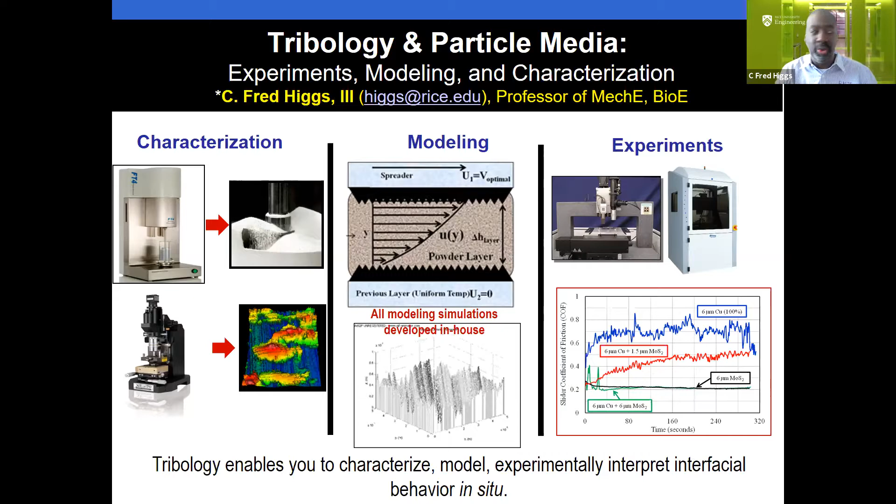This puts us right front and center with Industry 4.0, which I'll fully describe. Here at Rice, we have the Additive Manufacturing Performance and Tribology Center, known as the AMPT Center. We usually have an annual symposium, and we brought Rob here to speak along with other scholars from around the nation, and a couple from outside the nation.

We're focusing on this problem, and one of the angles we look at is the Industry 4.0 problem. Think about the industrial revolutions: the first one was an agrarian society that started adding machines. We started adding machines, and then we started assembling machines together beyond agriculture. Once you assemble machines to work in an assembly, you can put together cars like the Model T with an assembly line. That was Industry 2.0, the second industrial revolution.

Industry 3.0 is where we started putting software on these machines, and everything became automated. But we've recently entered the fourth industrial revolution, where now you have sensors, ubiquitous internet, and the cloud where you can put your algorithms. You have data constantly streaming in, if you have sensors on the machines, so data can come into them, or they can sense their environment and send data out.

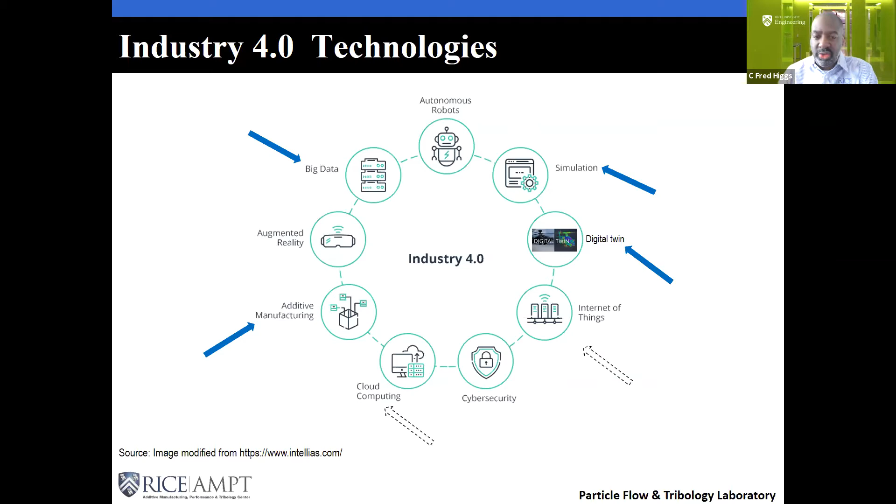Just talking about additive manufacturing - if you look at traditional manufacturing, which is subtractive, you start with the bulk material and just cut away at that bulk, with a machine or manually like a sculpture. You get a three-dimensional object there, but you get a lot of waste once you cut these geometries. But let's reverse that around.

With additive, you have a bit of powder material, and then you piece it together according to the CAD. You get a CAD for the three-dimensional object, and then a 3D printer binds the object solid wherever the CAD says it should be. You build your three-dimensional object without that same waste, just a little bit of what you started with - the more intelligent you get about your starter powder material, the less waste you have. There's also no geometrical constraints once you go from the bottom up, because you can have tubes and orifices.

If you think about it, we have a biological 3D printer, which one of my colleagues is working on. If you had no limitations to the material, you could have little tubes, we might call them veins, and bone material for any geometry. You go from the bottom up, you can create anything.

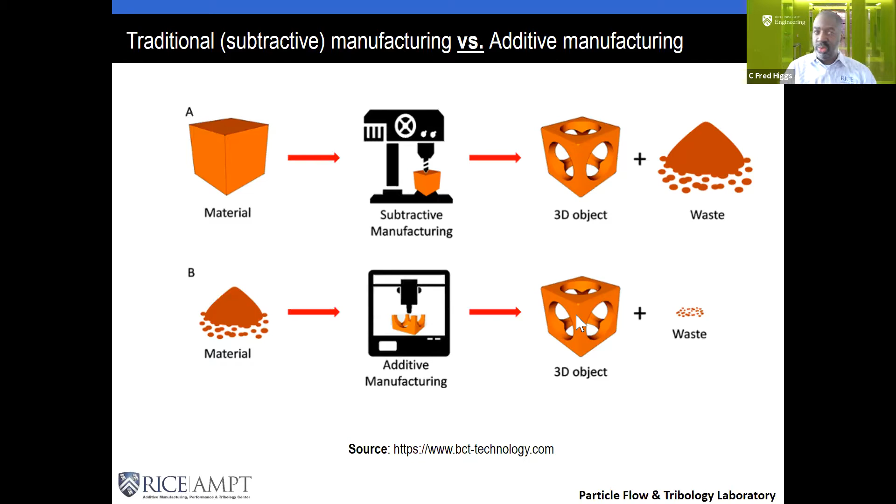Where subtractive manufacturing can't get the interstitial cavities that are there, because you're subtracting away. So the other exciting part is no limitations to design.

Zooming out to the big picture, I'm just showing the 7 main additive manufacturing technologies. Here is vat photopolymerization, light-sensitive 3D printing, material extrusion-based 3D printers, material jetting, where you're actually jetting the material you want to 3D print. We have binder jet, which is actually a powder bed 3D printer, which I'll talk about. We have a metal binder jet 3D printer in my lab, or it does any type of powder in principle. Then the ones you probably hear more about are the powder bed fusion 3D printers—these are both powder beds. Then there's energy deposition, sheet lamination, and others you might not have heard of, but there's 7. These are the companies that make each of these.

I just want to focus in on the powder bed 3D printers. So we're still talking about powders, and powders are interesting, right? They're particle materials which my lab has studied now for 20 years, that plus a little bit of my postdoc.

You have particles with moisture between them, fluid can get in between them. You can put stresses on them, little electromagnetic forces on those—I know Rob studies that with MEMS devices and other nanoscale devices. Particle size distribution, surface roughness, all these effects, cohesion, come into play when you're looking at powders here.

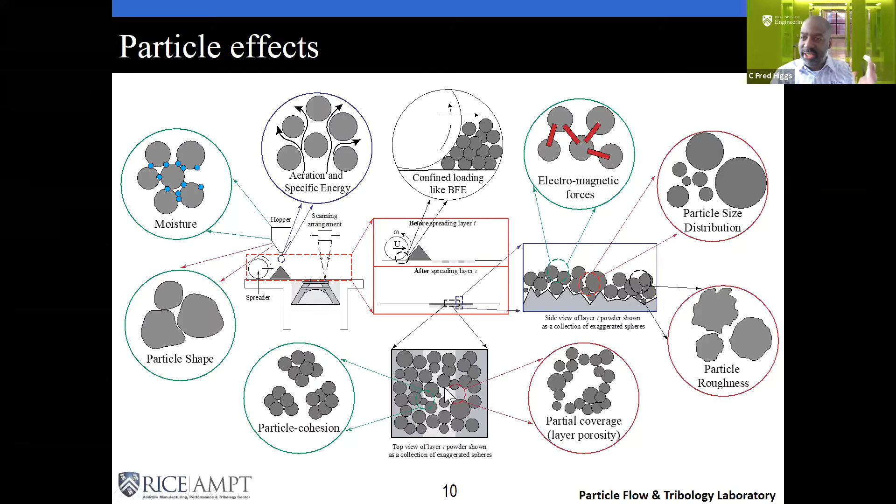Based on this top view of the powder, if you think of this in 3 dimensions coming out of the screen, as you keep putting different layers on, you're going to have different levels of porosity, which at the end of the day is bad if you're 3D printing a solid object. So your ability to understand the powder mechanics helps you understand the final part.

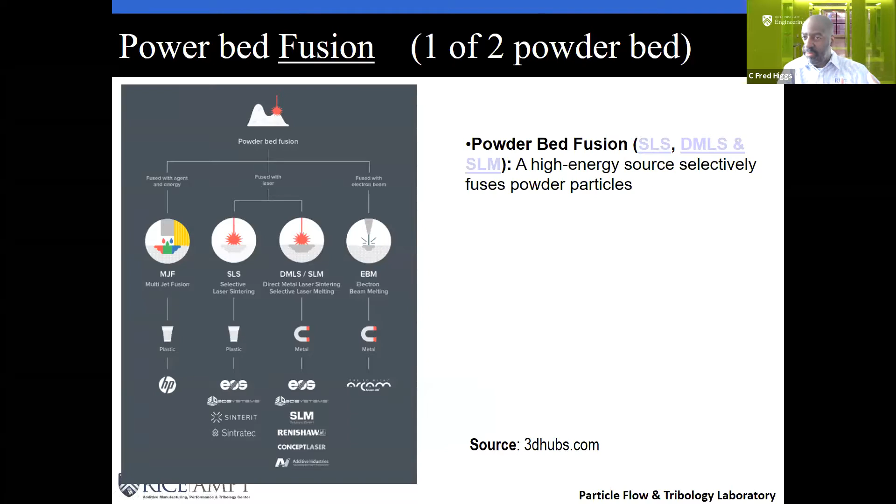Here's just a zoom in of powder bed fusion. Basically, my lab looks at it in terms of the binding mechanism. Here, the binding is beam-based—laser beam or electron beam—and that's how you solidify the powders. But you could also have a fluid binder process, like in binder jetting, where you have liquefied glue essentially, and you hit the powders, forming what we call primitives, these solid objects. You do that intelligently, understanding what's going on. This printer here is in my lab.

So I do want to dig into what we do with this a little bit. It comes down to these steps: powder delivery, powder spreading, powder jetting—that's the binding process, binder jetting—and then you lower the platform and do that all over again.

At the end, you have a wonderful set of chess pieces. If my son is on this call, he'll get excited—we're just starting to get into chess here.

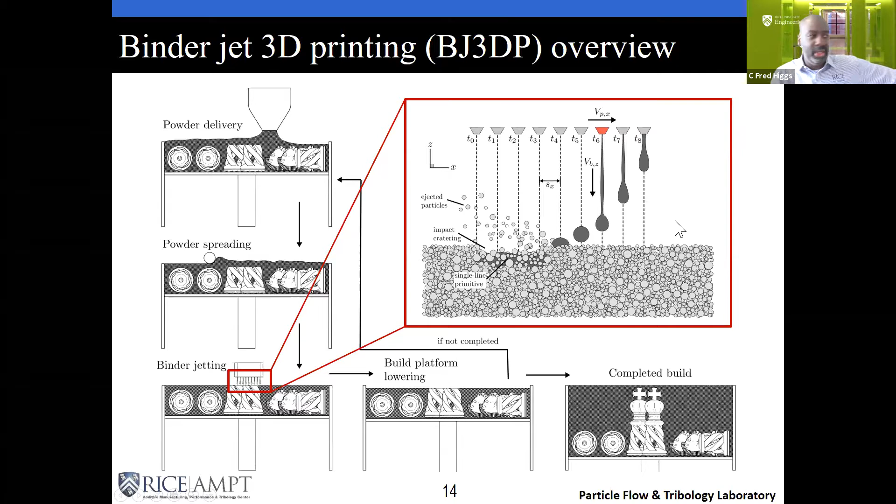But the action of the binding is also important. You have a lot of fluid particle interactions as these droplets come down from the binder jet. You have different binder jets, and they hit them at different times. You have all types of particle ejection and particle coalescence due to the fluid there. I want to simplify that in terms of these steps: powder delivery, then you spread the powder, binder jetting, and finally sintering.

It turns out that as a particle tribology guy like me, this just came right into our wheelhouse. We had a hammer, we were looking for a problem, and this came right to us. We're very excited about that—that's what PhDs are, we have students on the call. We're experts of this, but when you come into our expertise, we get very excited to unravel that problem and help solve problems for industry.

Let's look at one of the first things I want to show you: powder spreading, and what we've done with that. We have a powder rheometer in our lab that basically stirs powder and gives you the amount of energy it takes to do that. You can put air and fluids through it, stir it, and look at the different energy signatures of the powder. It allows you to find out something about the rheology of the powder, the flowability, and what we've brought into the AM community as a new term—the spreadability of the powder.

So here is a particular powder—here is Ti-64, titanium 64.

Here we're looking at it for different companies. EOS has a Ti-64, Arcam, Ametek. These are the first two 3D printer makers there.

And here you can see the bulk flow energy, the amount of energy it takes to stir that decreases, right? Here's the first one. It decreases as you increase in the manufacturer's different powders, which have different particle sizes.

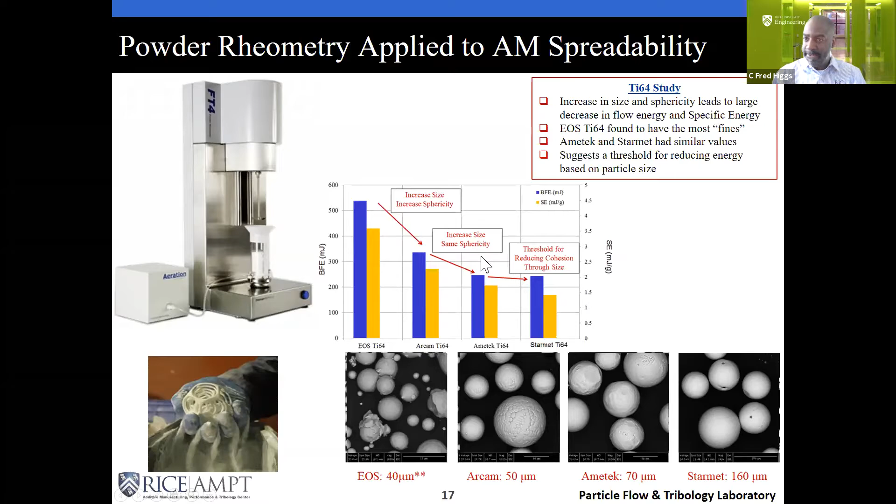And that's going to be important for our modeling, because here you have the physical rheometer. And again, as you get into kind of industry 4.0, it mixes - some people call it cyber physical, or mixing the digital and physical communities. You'll see how we do that in our laboratory here.

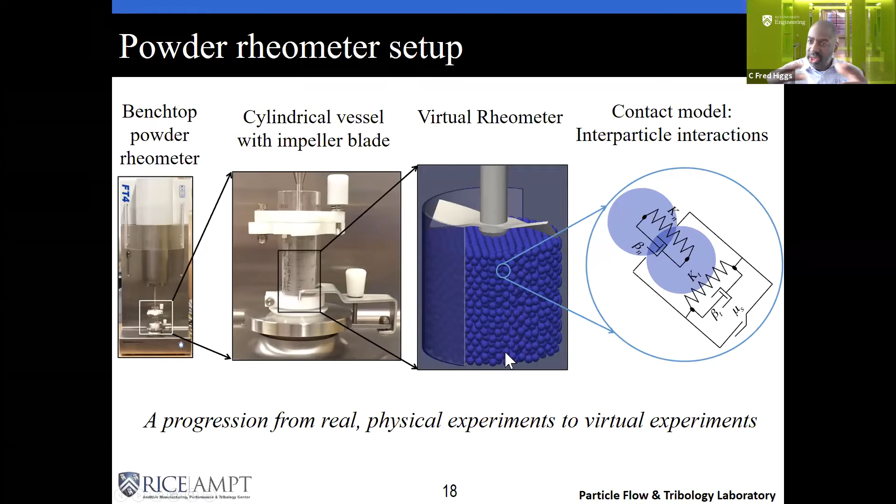So you have a physical rheometer there, which is a cylindrical vessel with the impeller blade going in the powder. We create a virtual form of that rheometer, or a digital twin of that rheometer, and then we do the contact modeling of the particles there, where we use the discrete element method to look at the interactions between the particles there.

But we always are validating these things, and then we can get lost in having fun and optimizing in the virtual world or the computational world.

So here's the ExOne binder jet 3D printer in our lab. There we have different types of characterization experiments we do with it. We've built a small build plate here to make little coupons that we can focus our analysis on there.

So here's the example of one. We look at - here's the printer here, has created these different cuboids, right? And remember, this is 3D printers, so we can put different process parameters literally on the cube.

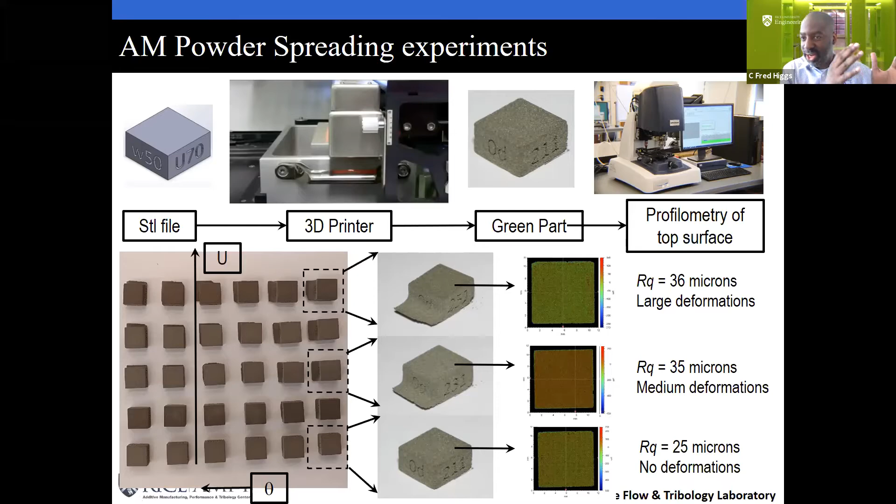So for every new powder that comes in, every lab now, you see those beautiful 3D printers? They are beautiful - they look like the Xerox machine, but they're not perfect like that. They're research problems always. So any new powder that's brought into your lab, it becomes a research problem to get to getting the perfect spread.

We want to be able to have models to guide that. And so here we've done that. So here's a spreading simulation here where we have a roller rolling over powder.

We're running a discrete element method on the powder. As the powder changes colors, you're watching the velocity magnitudes there. And then we can just look at the quality of the powder in the virtual sense.

Then we bring machine learning in to connect the inputs. In this case, it'll be the spreading parameters like rotational velocity of that spreader, linear translation velocity, and then we input what we want the roughness to be for the different layers. And then you get different outputs there, like porosity and surface roughness for the overall object.

And so then we end up creating these process maps here. In this particular one, it relates the throughput of the volume, the amount of powder that you can spread, to the surface roughness. And you get these different curves.

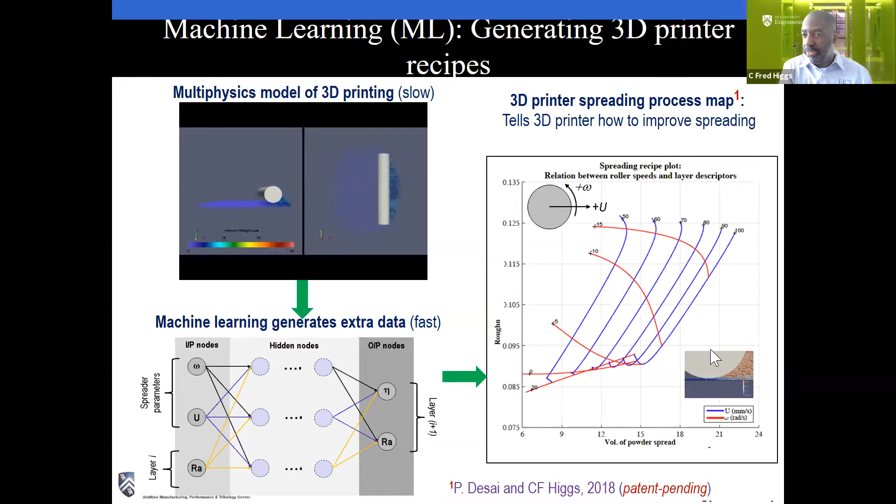It's a tractable curve that an engineer can come and say, oh, for this powder, I need—red is the rotational velocity of the spreader, and blue curves are the linear velocity of the spreader. I need to get to this point to achieve this roughness at this throughput of powder. And so we have that there, or you could program that into a printer and have it controlled.

And so, I would like to say to the students, we still are engineers. That's why I became an engineer. I was excited about it there. But so we try to always translate whenever possible to industry.

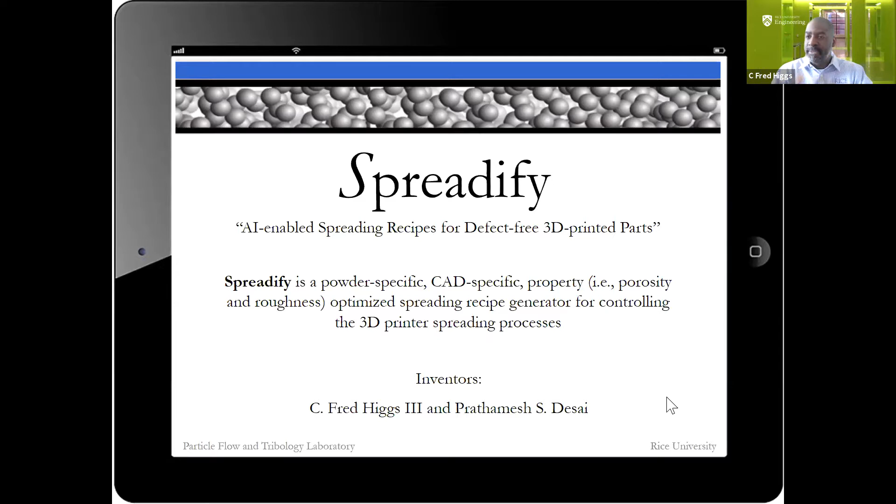And so in this particular one, all of that work goes towards a tool called Spreadify, where AI-enabled spreading recipes for defect-free parts, meaning low porosity, no distortions as much as possible. And you're using physics to figure out what the winning recipe is from that process map. And then you would tell the printer, these are the parameters for spreading this particular powder.

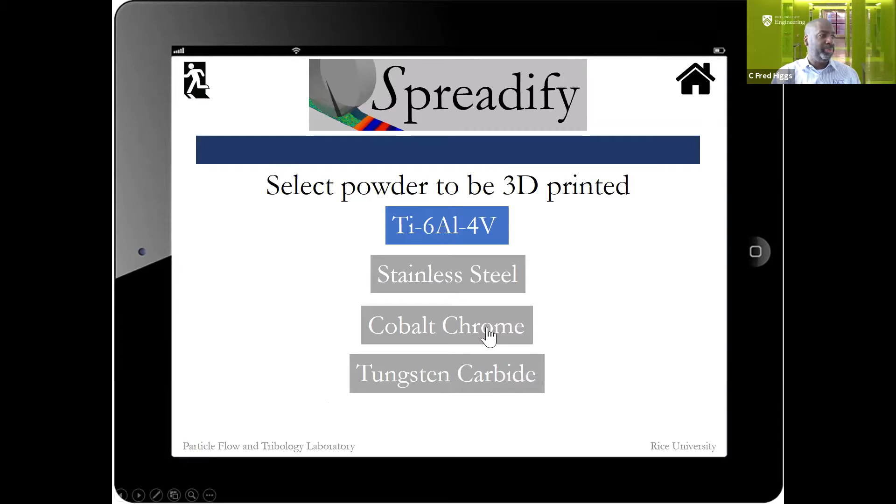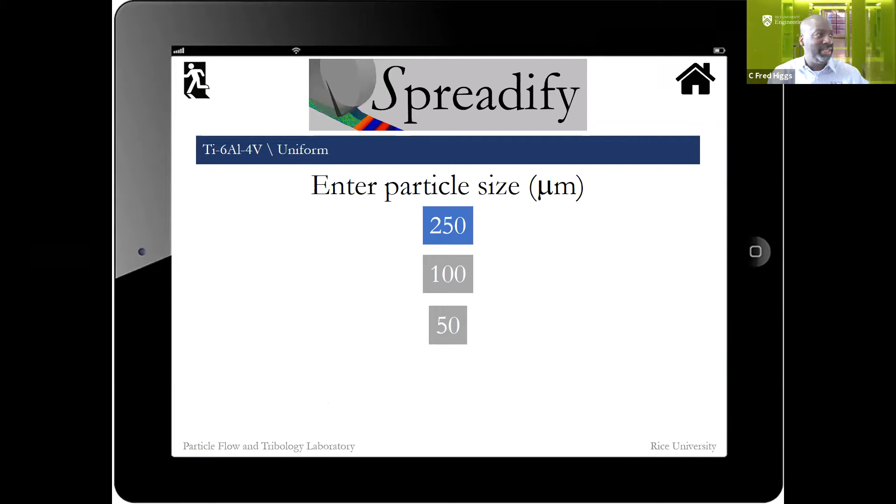So we come into a tool like this, Spreadify, click enter, which powder do you want? Ti-6Al-4V. Particle size distributions can be of different sizes. We'll say uniform. What's your particle size there? It relates to the amount of energy it takes to spread it. We'll say 250. So now we have a virtual avatar there, or a digital twin of the rheometer.

It's spreading, doing the analysis there. And as it turns out, it gets to the end, and you can figure out, well, what do I now want to 3D print? Let's say a cuboid here.

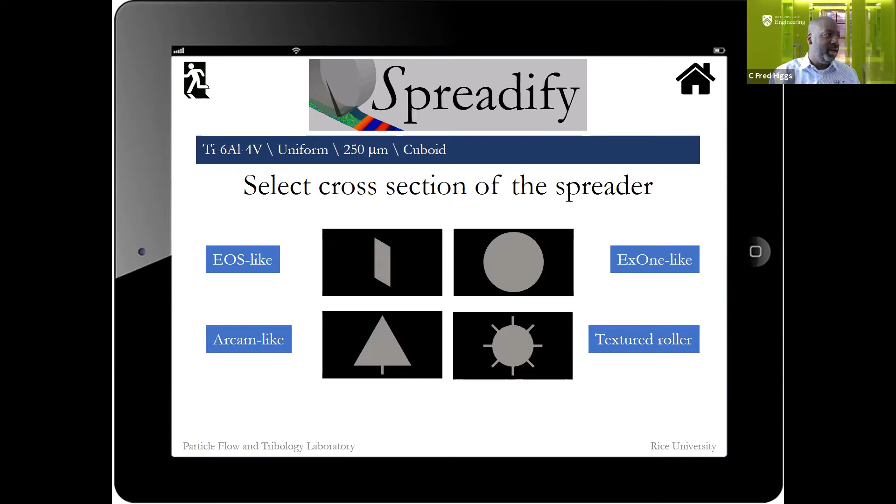What is the geometry of the spreaders? All the 3D printers have different types of spreaders. To us, it's just a boundary condition issue. And so you can have any of these printers, like the one in our lab, or the Arcam, or EOS. These are beam-based printers, so they get it through energy beams.

And so here's one for an Arcam-like spreader. We spread that same pattern, and we would tell them what the spread recipe is, or what's the spreadability for this particular simulation. Then that's fed to the 3D printer. Here's the ExOne, it's a roller, right?

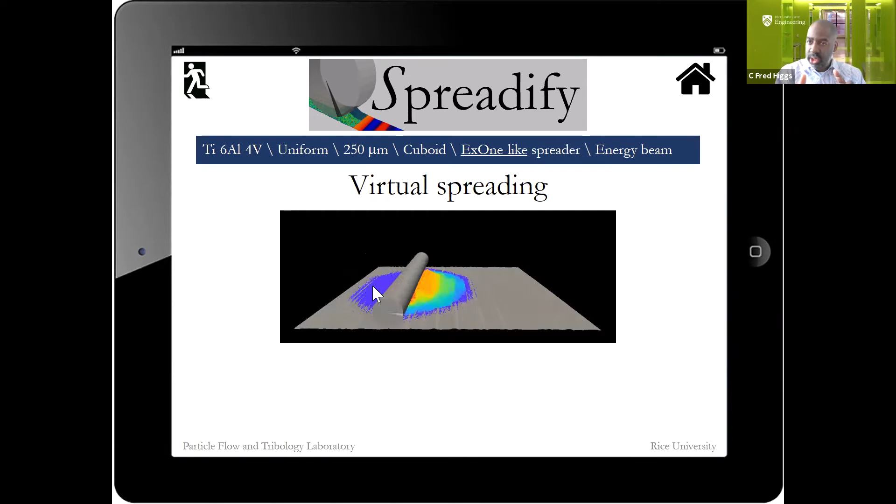So as you're spreading this powder, look at the—I'm a tribologist—see the undulations on those surfaces there? So we are accounting for the surface roughness on the build plate or each lower layer.

And here's one from a textured roller, right? We talked about doing this. Basically, you look at the roughness of the powder—can you design a texture for that? A tribologist like Rob would get excited. He'd probably say, hey, I can put a fractal signature. Actually, Rob doesn't like fractals. He likes multi-scale modeling, which is a competitor method to looking at roughness. But can you figure out what is the proper texture on a spreading device to achieve a certain smooth roughness? All these things are surface interactions. These are things that a particle tribologist like me would get excited about.

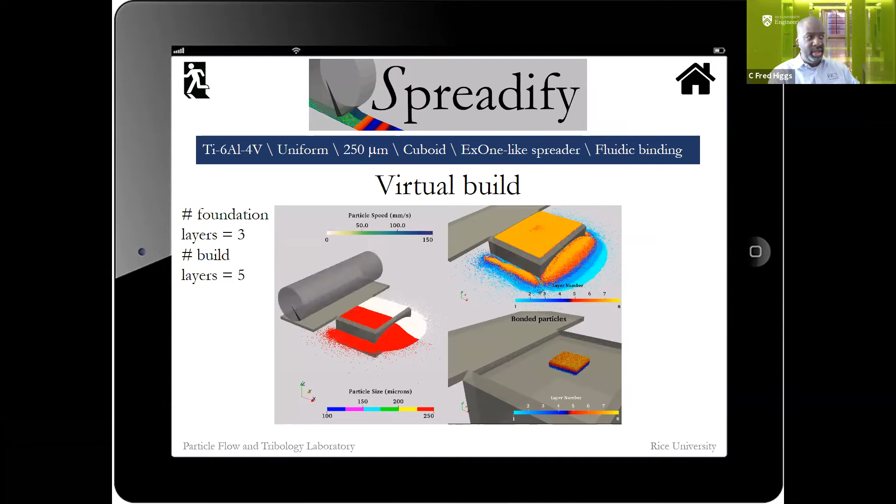And so once we had that, then you say, well, let's do a virtual build. Let's look at the cuboid and see if it comes out distorted. And so we do a virtual build on that. So you have a digital twin of our ExOne printer going in and making this particular device here. Yet we haven't talked about the binding process there.

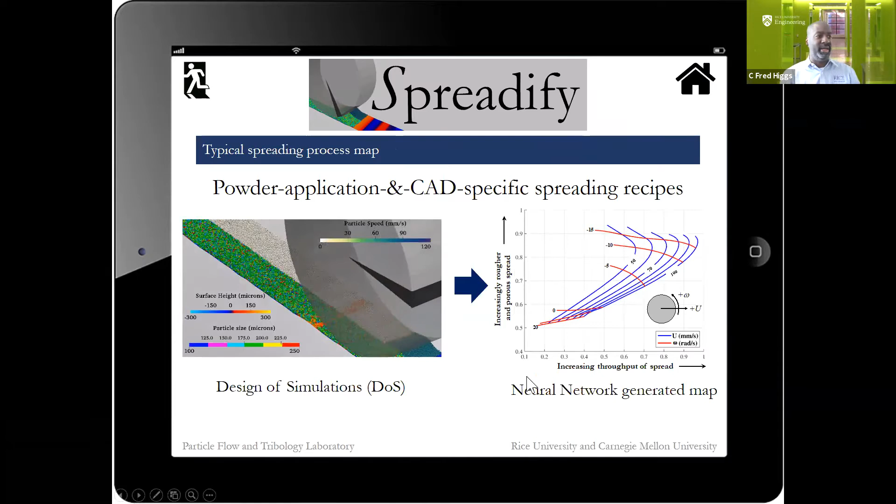But out of that, you come up—we always are coming up with these tractable process maps here. Again, you find the coordinate to achieve faster printing, to achieve a certain roughness, low porosity there. And that's what you're trying to come up with. We're just looking at different simulations there. And then you start your 3D printing. All this is done to prepare for the 3D printing process.

Now let's look at that—that was all powder spreading. But what about the fact that if it's a binder jet printer, you have droplets coming down, forming that?

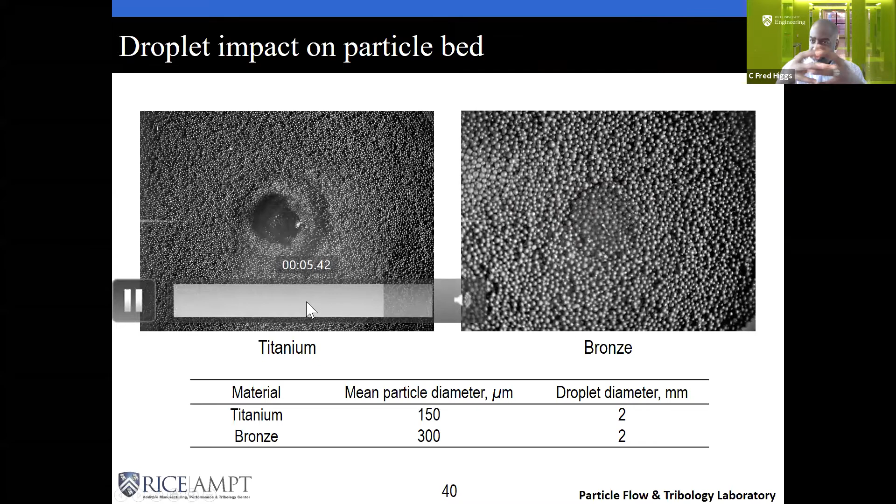Is there a tribology problem inside of that we can get excited about to optimize the performance? And there indeed is. Here's a look at a droplet coming down on two different powder beds. On the left, it's a titanium powder bed. On the right, look at that, it pulls these particles together. The fluid forces are pulling them together into what we call a primitive there. We want to see if we could begin to look at that.

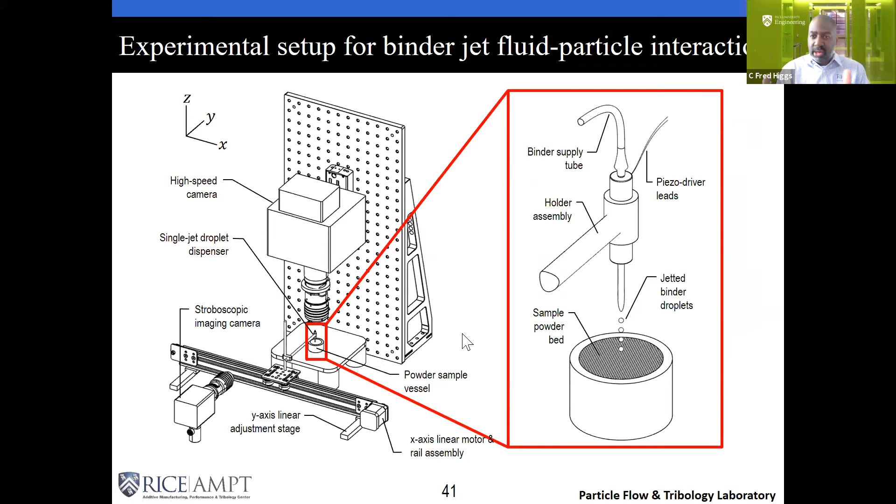So we created an experiment in our lab. We always got to validate our models, then we can go to town with the models. So we have a droplet experiment that we put here. We can drop powders in a controllable way, fluid droplets in a controllable way on different powders. We have high-speed imaging, so we can image that and begin to see if we can come up with a performance criteria to judge the quality of the binding.

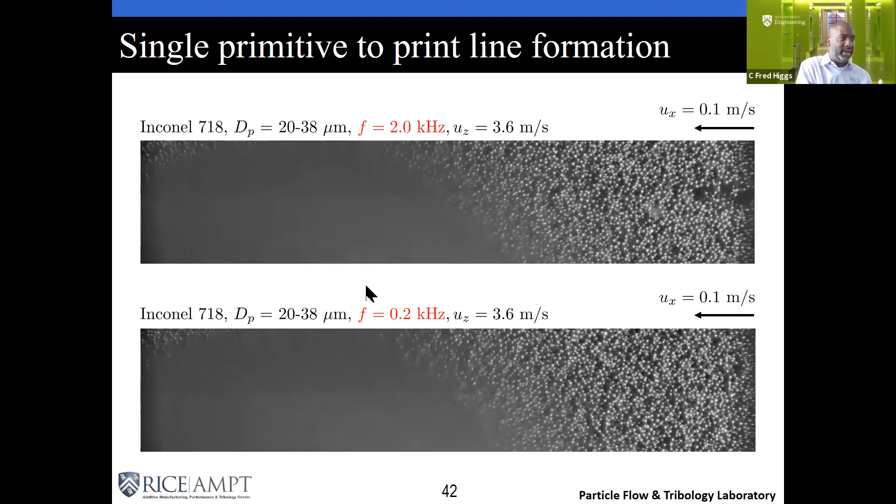So here you can see the top one, these are similar simulations, except the top one is going to have a faster droplet frequency, and the other is going to be a little bit lower. So we let them come across, and you have the various types of binding that's going on with the powder that's there. Everything else, you hold pretty much the same.

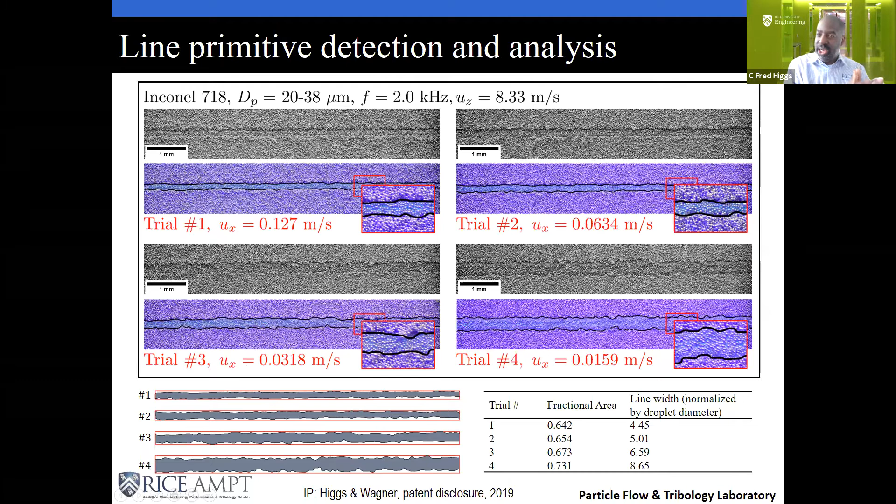And so we end up coming up, we have different trials, and we start to have a criteria for judging it. This particular one, we say maybe the best way to look at this is to put a bounding box around the different primitives that were formed there, and look at the fraction of that box that is formed into a primitive. From that, we have high fractional areas. So we could say something like trial number 4 was the best one because it had the largest fractional coverage area. But these types of things start to get us towards being able to judge what winning is when we go into looking at this as a model.

So let's get right into the computational models. I'll remind you that all the models you see in my lab are done by hardworking PhD students, so there's no commercial codes used. We have all of our codes in-house designed from the ground up.

One of the things we try to do for the tribology community is look at lubrication approximations, but we try to bring in things like the Reynolds equation, and also bring in the full 3-dimensional time-varying computational fluid dynamics. I teach a CFD class, so the students come into my lab ready to do this. And of course, we have the discrete element work that we talked about earlier, where you're looking at forces on particles. Bringing that together is what you need to do to model these different problems.

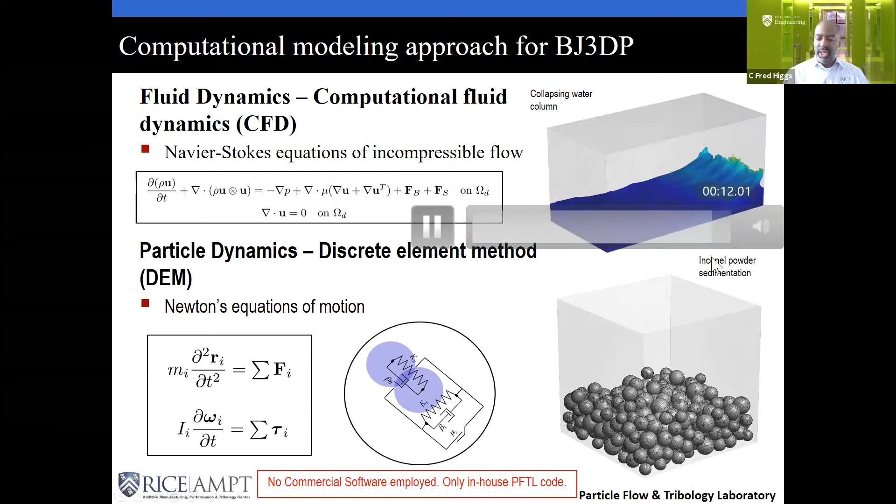So let's look at our approach. We've been using this volume of fluid approach to account for the fact that you don't have the full domain in a fluid, but just some places in the domain have a fluid. Here's a look at just dropping a solid particle. This is not a fluid particle yet. We're watching just basic interaction, dropping objects on powders to see if we can account for what we've seen.

In the community, we know there's particle ejection. You can see these particles bouncing out there, and then there's particle movement too. So our powder bed looks to be okay in how we're accounting for that. We have the real properties of Inconel powder, which is one of the three-dimensional powders. So we felt good about that.

But now we wanted to bring into effect fluid droplets. The fluids don't hit everywhere. It's not fully immersed like most of my work that people have seen. So we had to use this volume of fluid approach where you're looking at the difference in phases there. One phase might be air, one phase might be liquid, and you account for those different concentrations in different zones.

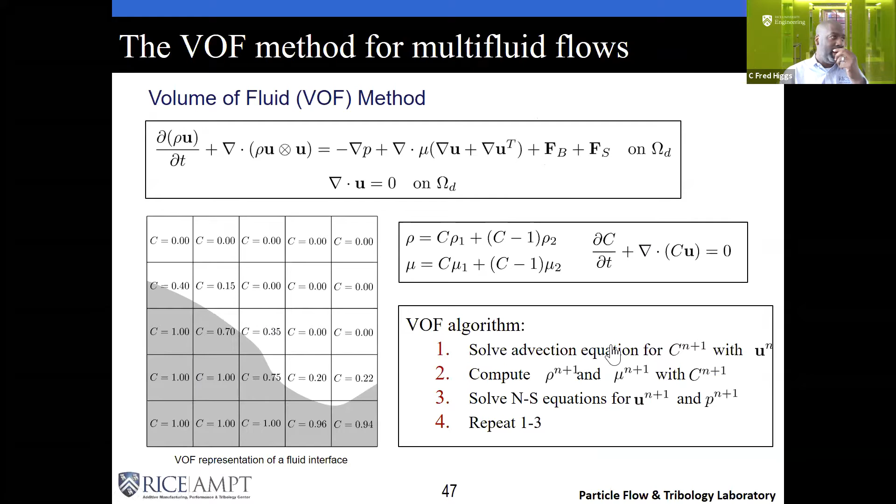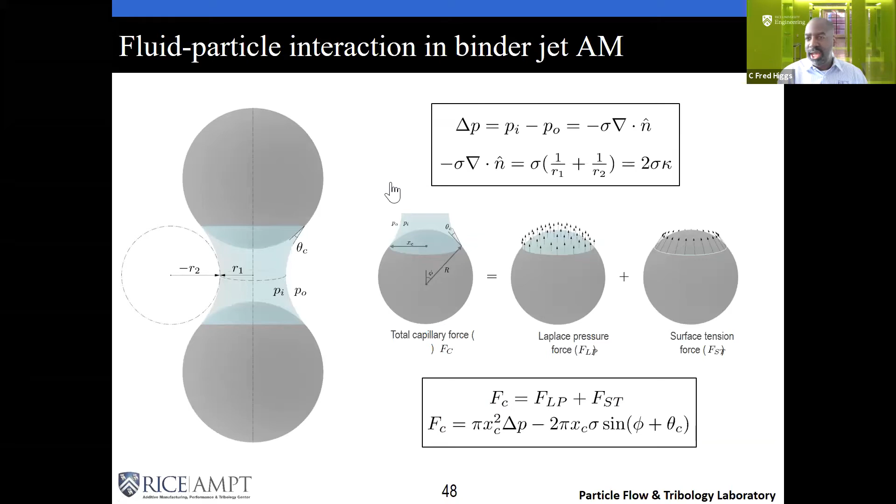And then you could track the interface between different fluids there. Then there's fluid particle interactions. You have fluids pulling on particles, creating a total capillary force, which is a function of the Laplace pressure force

and the force due to surface tensions pulling on these particles. So now we're ready to look at a fluid dropping on a powder bed, not a solid particle, but a fluid particle here. And we're looking at it for two different contact angles - the angle between a fluid and a solid surface. We've input this as 30, and we've input as 150, more hydrophobic here, this is more hydrophilic.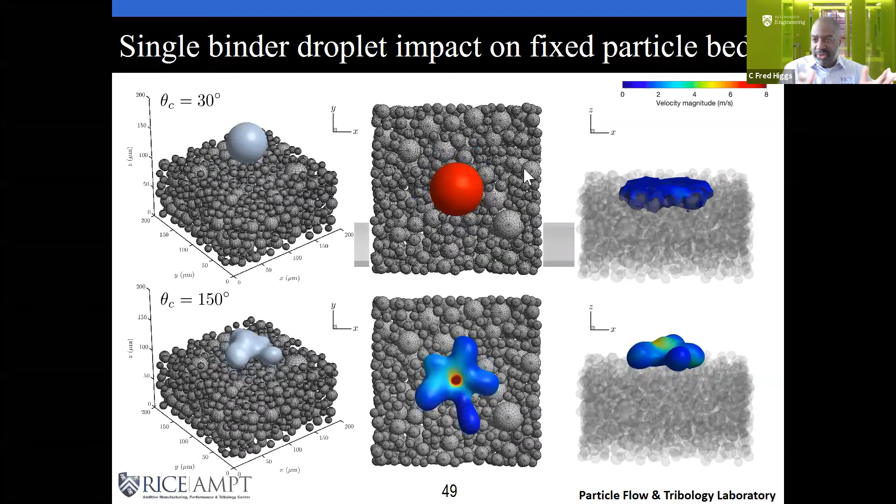You can see now, this powder bed is fixed for this simulation. We just wanted to look at the fluid behavior against a solid powder film, although the powders are not free to move in this simulation. And so we kind of like what we saw there.

So then we said, well, let's look at it if multiple droplets are hitting a powder bed. And we thought that looked similar to what we've observed there. And so we said, then let's start to relax things.

We used our simulation and saw that we could get a pretty good match with the simulation there. So it gave us some confidence in our fluid particle interactions.

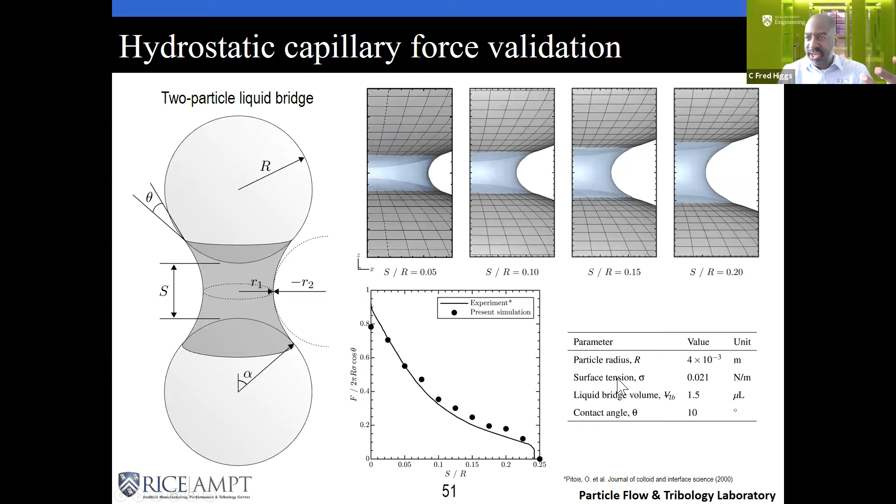So now we said, what about it in a tri-particle situation? We have three particles together - what about the liquid bridge there? And we saw, again, we're reasonable with our simulation, the solid dots there.

We actually match closer to this Surface Evolver curve, which is a different way that people looked at it, just looking at the energy between particles. We were closer to them than to the experiments there.

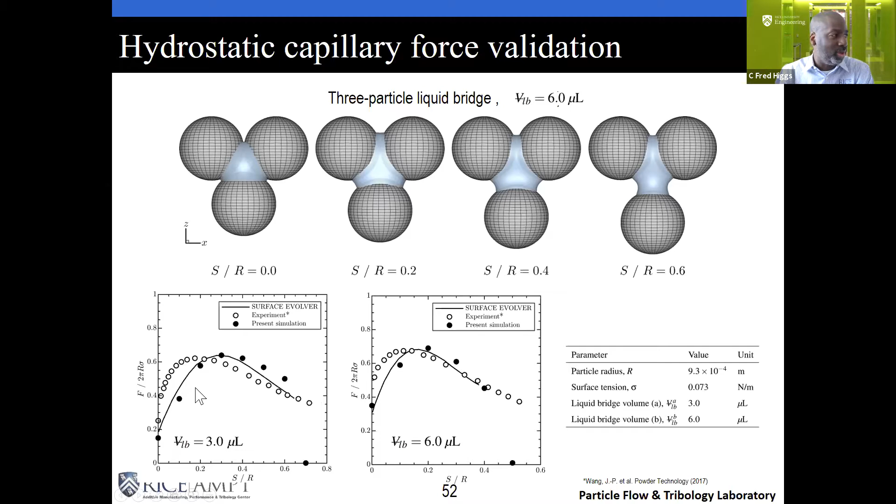We went back and looked at the literature, and it turns out from the experiments, they had doubts on determining what their spacing was. So we matched another well-known simulation there, and the experiments expressed doubts in what's the true distance and the accuracy of that. So we don't feel too bad about being off since the experimenters were not totally confident in their distance.

But so it shows us that we're able to kind of do this. Here's a simulation where you pull things apart and you look at the forces that are on them, all the way to breakage - at the end, it breaks off. And that's where our simulation shows the forces decreasing as the distance between those spheres is increasing, and then it goes to zero as you break the fluid filament.

And so that let us know that we think we understand fluid particle interactions. Now let's look at it in a bed, fluid droplet hitting a bed, powders allowed to move freely, just like you'd have in 3D printing. And let's see what will happen there.

So you have over here, this one - look here though, the top view. As it hits those particles, it begins to pull them together into a primitive, right? And the size of that primitive is the resolution that you can print. So you can imagine the different size particles and the type of fluid that you have all going to the primitive that you get there.

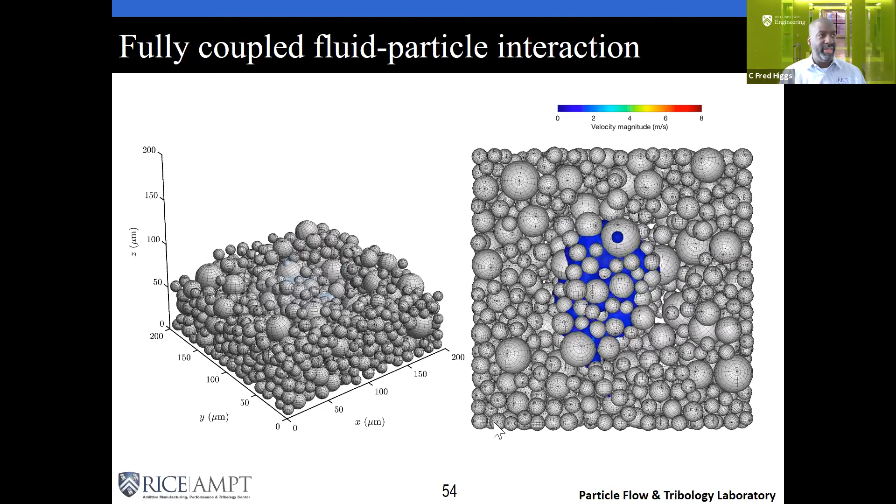And we're modeling this accurately, which means we can now start to do increased frequencies and linear translations and things like those, which I'm not showing in this talk. But all of this is really understanding particle fluid interactions.

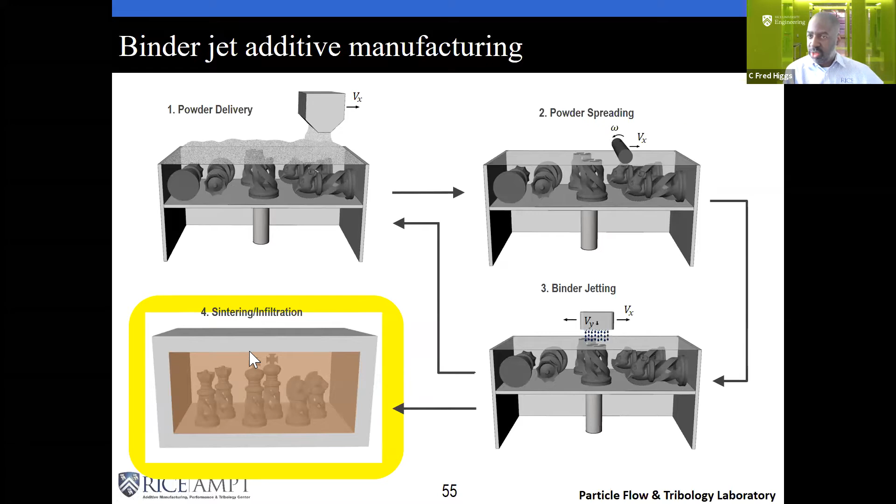The last one I want to show just briefly is sintering. Are we working on that problem? We consider that largely a material science problem, although we're particle people. So we team with my colleague, Zach Cordero at MIT, and we have a joint PhD student, Lenora Grant, there.

And we've looked at this problem of what if the binder itself goes down and can crystallize into little particles in between, little nanoparticles. So it comes in as a liquid, it crystallizes when it's heated into nanoparticles that can then fill the gaps between particles.

Will that cut down on sintering? Because it turns out at the end of binder jetting, you have to heat up these systems and watch what happens to them. So when you heat these up, you want them to become solid geometry that won't move.

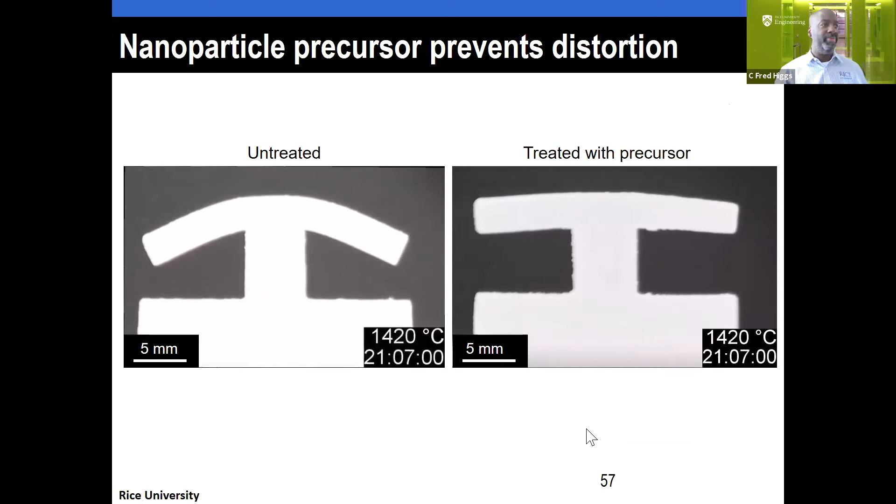But the problem is that they distort. So here we use this precursor that we put in, a titanium dioxide precursor, and it formed these solid necks, and it did reduce the distortion there. So here's untreated, this is what you normally get in binder jet 3D printing if you don't do a smart solution. Companies like ExOne and others have their ways of trying to deal with this. Here's a look at one with our technique where we put in a binder that can turn to solid particles. You do decrease the creep that's there and the distortion that results.

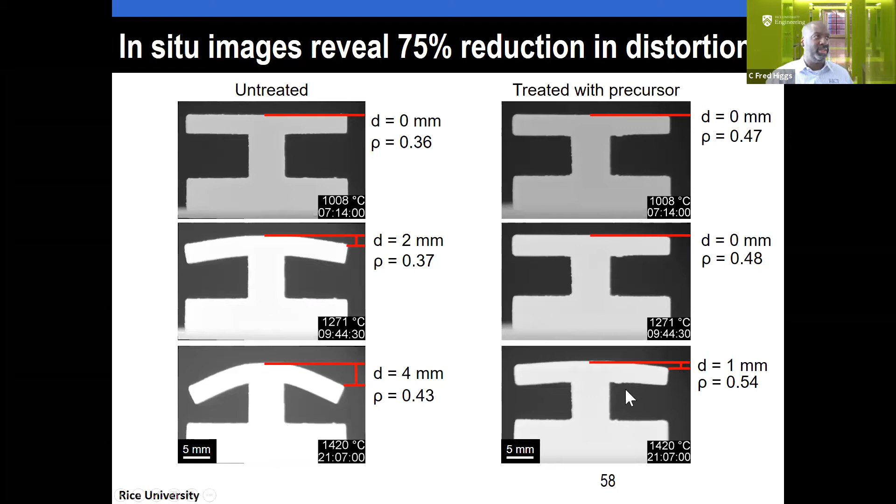So now you can see that we pretty much can model the entire binder jet problem in some form, or at least we're involved with it. Let's apply it to a problem like energy.

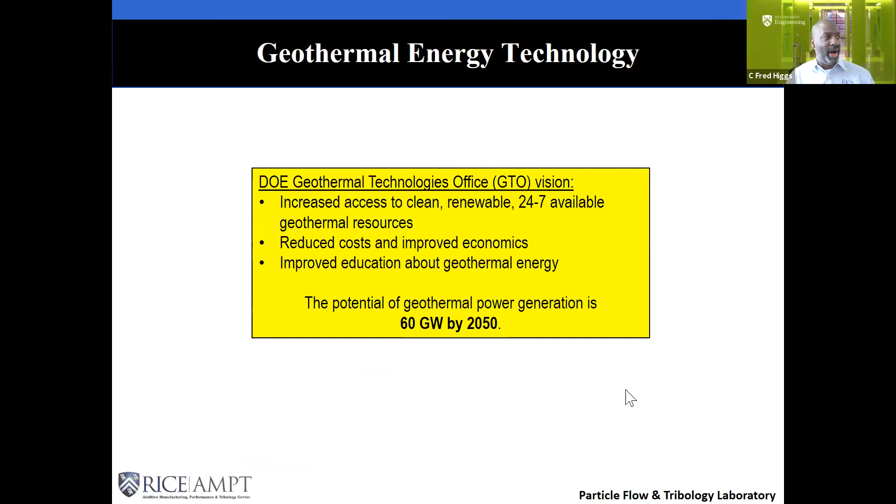So you have geothermal drilling. Basically, you want to get down to where there's a lot of heat to be able to run different things. There's a lot of geothermal reservoirs in different parts of the United States.

Well, this is an exciting problem for my mechanical engineering undergrads. I like to put up a thermodynamic cycle. Basically, geothermal would just bring you heat, right? And now you can heat your working fluid. And so your working fluid goes around to the turbine, generator, get electricity, goes to a condenser, condenses back out, you go around.

So where you have the boiler, you would run geothermal heat free from the ground there. And that's what they do to create power from geothermal systems. To my thermodynamic students, I like to show that.

But back to the drilling problem, you have to get down there to where these geothermal reservoirs are. So you're drilling down there. And so you want to have a drill bit like this polycrystalline diamond bit communities use for doing that. It's a clean energy problem. So not all drilling is bad.

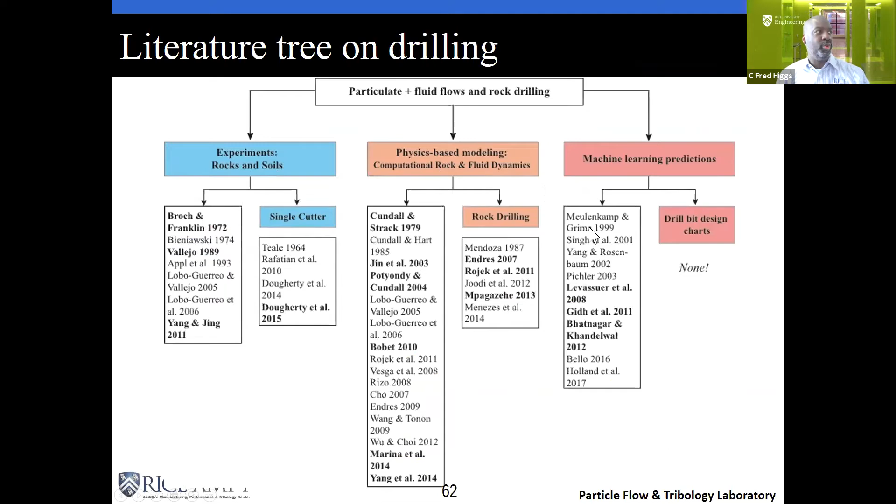So, you know, we have done a literature survey behind it. Young scholars, you want to get into the literature. Here we've looked at different experiments and modeling and other things that you're doing with the drilling problem there. And it forms the design-for-additive manufacturing framework, which you'll see with us.

So you start with the rock, you characterize the rock, you characterize the powder because you're going to give a recipe to a 3D printer. You get digital twins of those here. We do literally virtual characterizations.

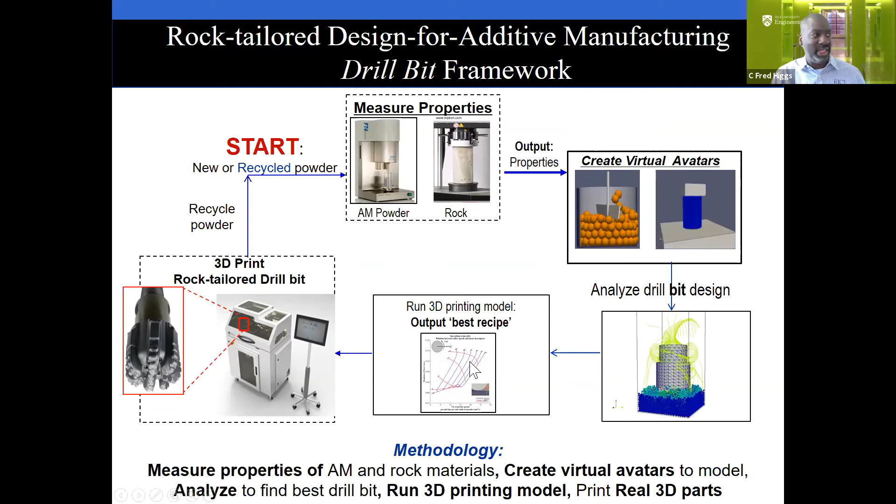And now you can put a drill bit in that, optimize for rate of penetration, get your nice process map, tell it to the 3D printer, you can print out a drill bit there. Here we have a drill bit spinning in fluid. We run the full CFD analysis ourselves.

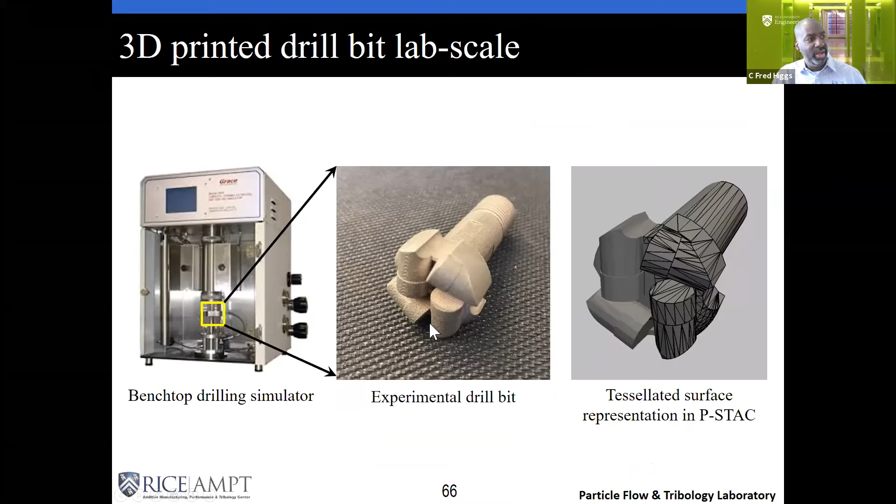We end up printing these drill bits in our lab there. Notice there are different cutters on there, and the different angles form the different types of PDC bits that you have. So here's a look at a drill bit going into a rock there.

And so we do different drills. We can look at what that means against experiments. This is our in-house code, again, that we've made from the ground up, P-STAC, Particle Surface Tribology Analysis Code, so the T is tribology. And this is just a dry one.

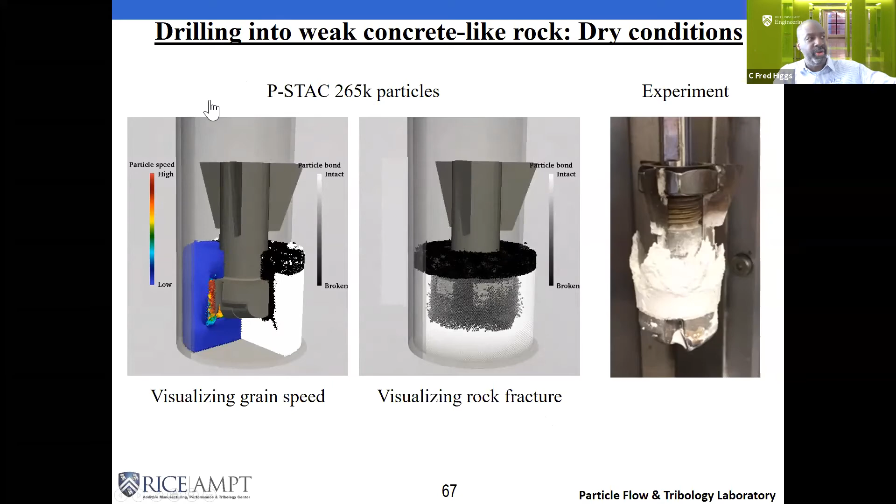What happens when we put fluid in there? Here we have the fluid in here as well, being accounted for. And now you're drilling that rock. You're watching the rate at which it goes into the rock. It's known as the ROP, rate of penetration.

I like to show this simulation. You see this? This is fluid pressure to my tribologists there. So we're looking at the fluid pressure under the drill bit, and it generates a little lubrication pressure. We take that lubrication pressure away from the weight that's on top of the bit. Weight on bit is a property that's in the drilling community.

So we say the weight on the bit is reduced a little bit by this fluid pressure that's there. And so you have a new resultant weight on bit that you need to account for when you're looking at your rate of penetration.

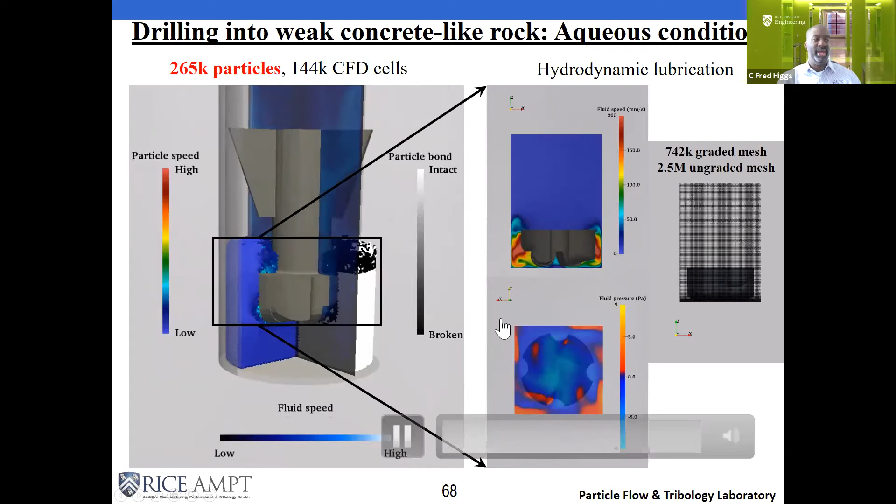So we are solving for the lubrication problem right beneath that drill bit as it's going into the surface. And so we end up with experiments and modeling, something we're still working on here, getting the exact same experimental system. We can do it for lower loads, and basically the same speeds. But we're working towards that, and based off of getting that match against the experiments, you can begin to change the design of your drill bit to achieve a certain rate of penetration for different types of fluids.

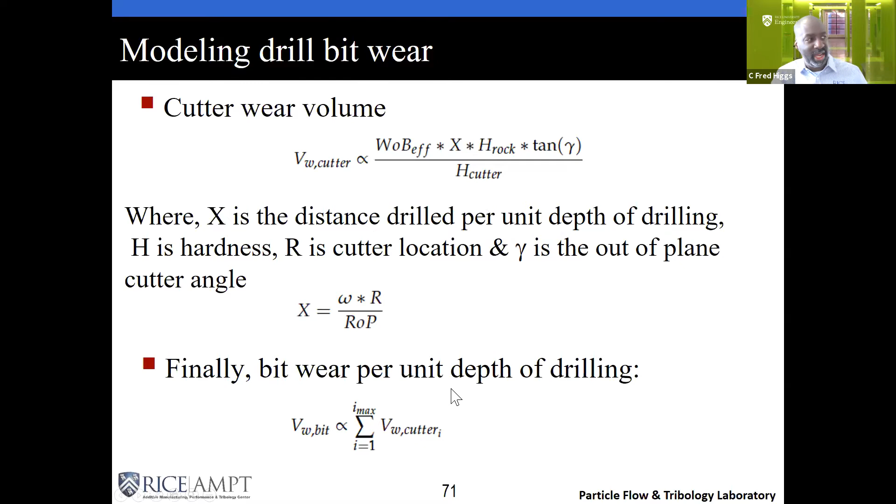So, for example, we can look at the wear on a cutter, per unit depth. So we have properties in the cutter, we can account for that. We can then say, based off of these parameters on your drill bit, you can have a certain rate of penetration. These are just switching input and output parameters.

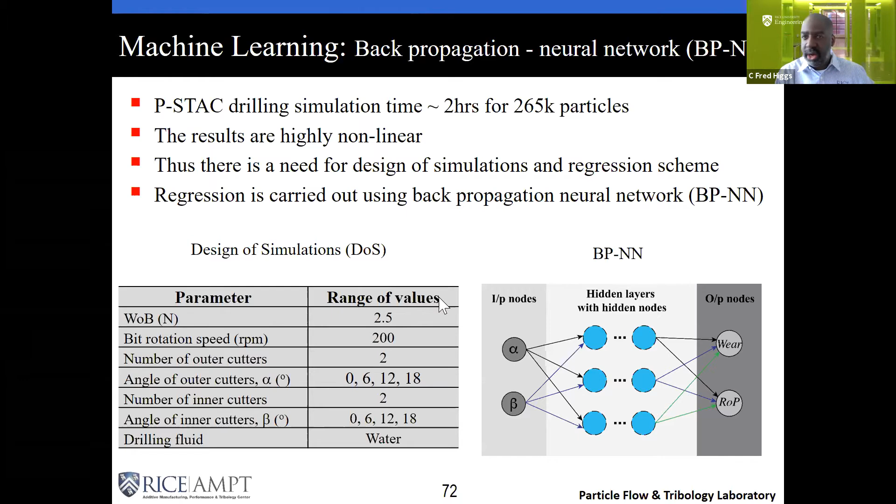So we run our full physics-based simulation. We run a few of them, and then we start to have machine learning guide the physics-based model. It runs our physics-based model to get a bunch of parameters, and then generates a mapping between those two. And so we get something like a blanket like this, where you have training data. First, we validate our physics-based model, and then that model becomes our key data.

And then we throw out a few points to match for different angles on the cutter, on the PDC bits. We look at the wear volumes there, and we test that, and then you watch the points. You have some data that you train it for, and some data that you test on, where you're blind on things, and then you see if you have a correlation. We get pretty good correlation there. Now that means you can get away with your physics-based model, put that away. Now you have the neural net that can represent that system.

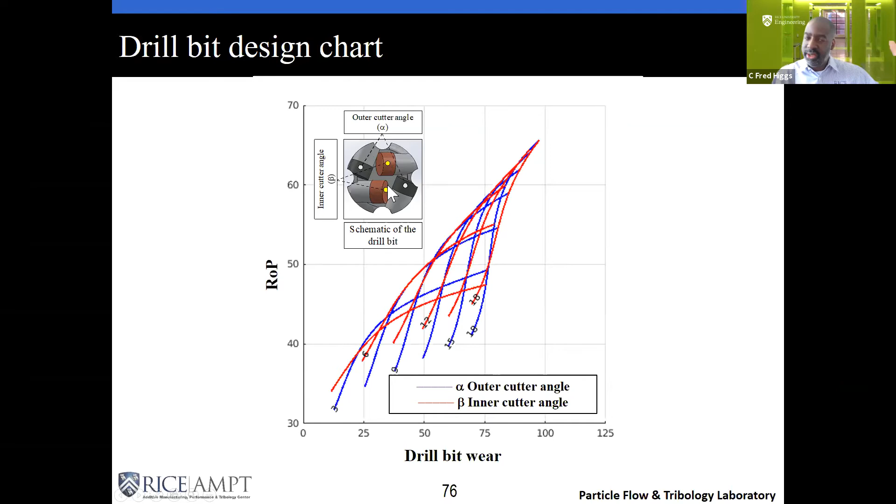And so you end up being able to generate something like this, a process map. We love our process maps, where the coordinates of red and blue go with the different cutter angles on the PDC cutter, and you have a final drill bit wear and rate of penetration that you could predict. So the design parameters are red and blue, and the performance parameters are, weirdly enough, on your X and Y axis. So you change the design parameters, you get different levels of wear, different levels of rate of penetration. So now you have lifetime prediction, and performance in terms of rate of penetration.

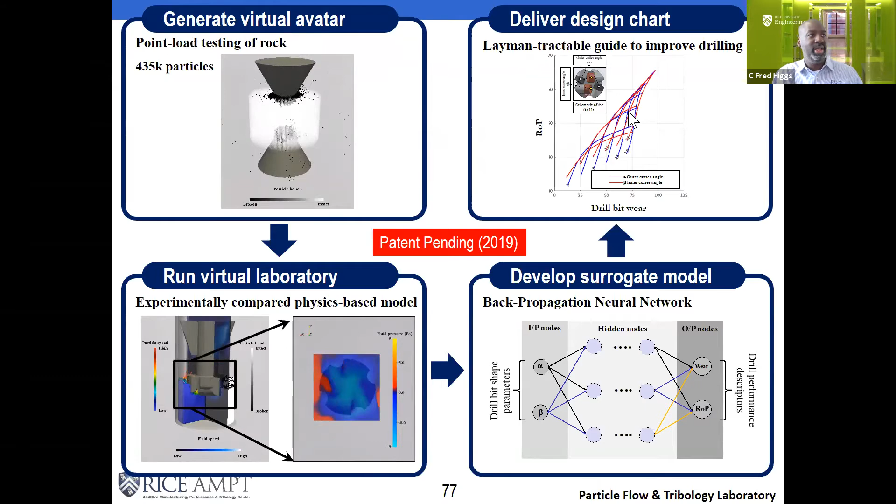And so you put all that together, you've got these avatars, virtual labs you're running, machine learning, and you come up with the process map. That always guides the engineers on what to do, whether you're putting it into a machine or you're just telling someone what the design parameters need to be for a bit.

And so again, we try to get this into something tractable. We keep our students excited about trying to constantly translate things. We're not scientists only, I should say. We're engineers, so we want to get this into the marketplace.

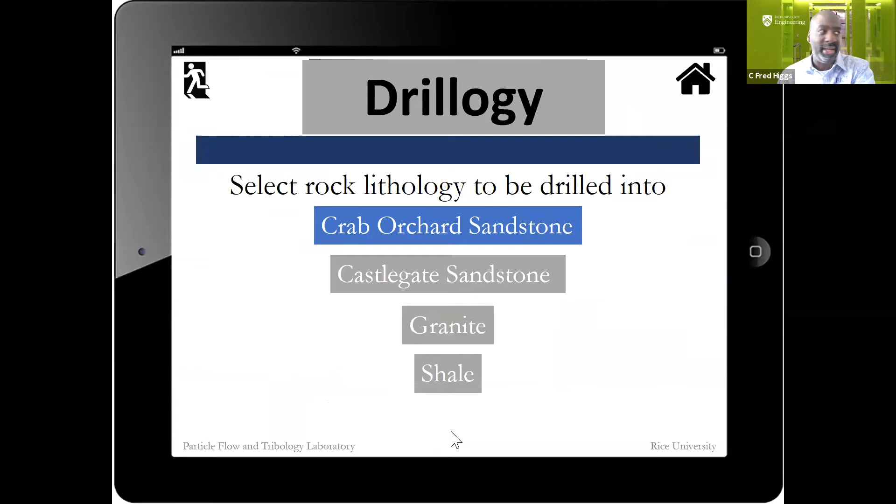So here's the Drillogy tool here, and so you can press on Drillogy, and it says, well, what kind of rock do you have? That's a different geomechanical property. What about the grain sizes in the rock? What are the particle sizes in that particular rock?

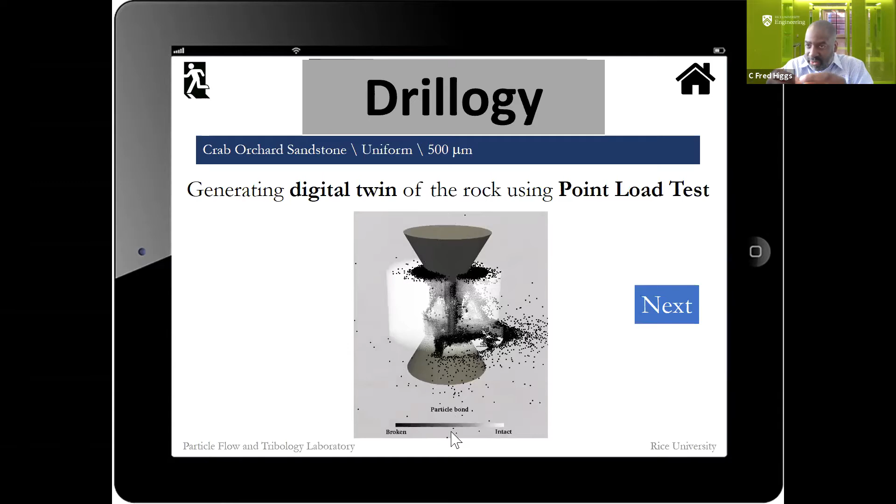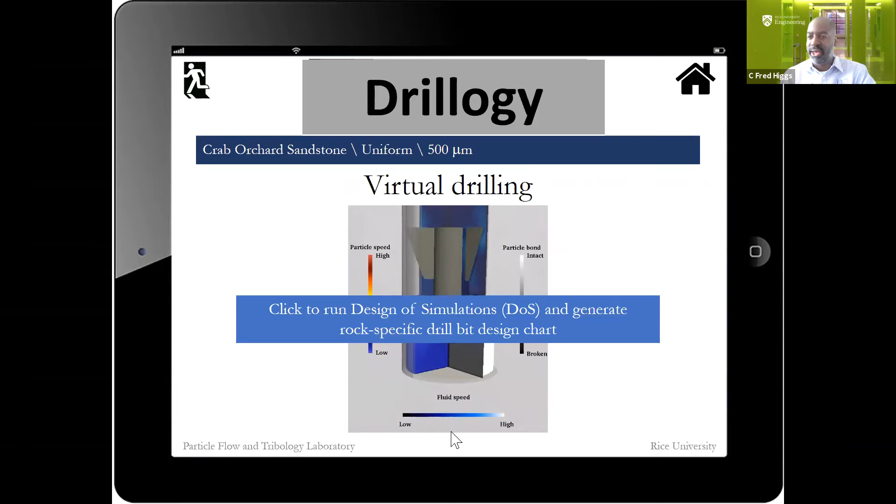And so then you do some characterization tests. We're always doing these characterization tests so we can micro-tune the properties of whatever it is, in this case a rock, to see when it matches that. And then we could do rate of penetration tests virtually, and now we could look at performance. We're now ready to go and generate a design chart of this particular drill bit.

So the design chart there is done through machine learning. We end up with this chart here. Now we could vary the parameters on the drill bit that are personalized to a specific rock to get a certain rate of penetration.

We can start our well planning: depth of well, rotational speed within the well, weight on bit, I talked about that earlier. When do you fail, right? You do a lifetime prediction, you need to have a criterion for when something fails.

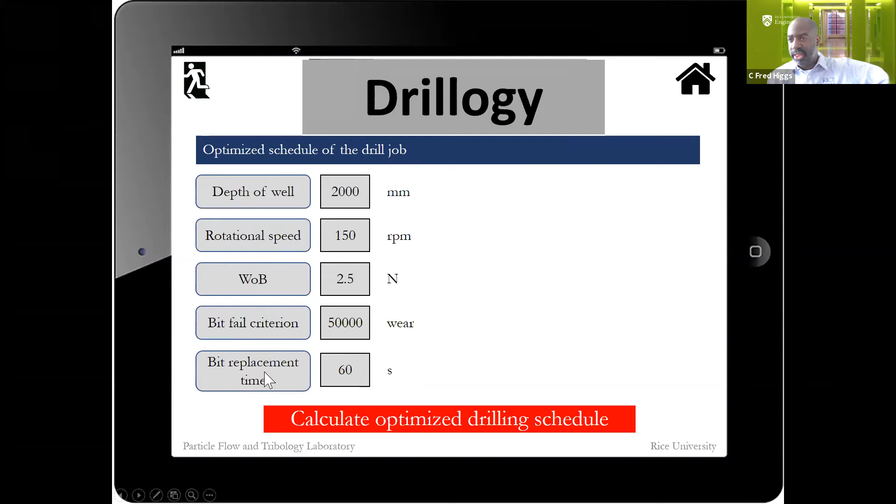And then you'll know that your cutter is worn this much, so now it's failed. And then you can calculate times for when you want to replace your bit. That's what they care about in the drilling industry.

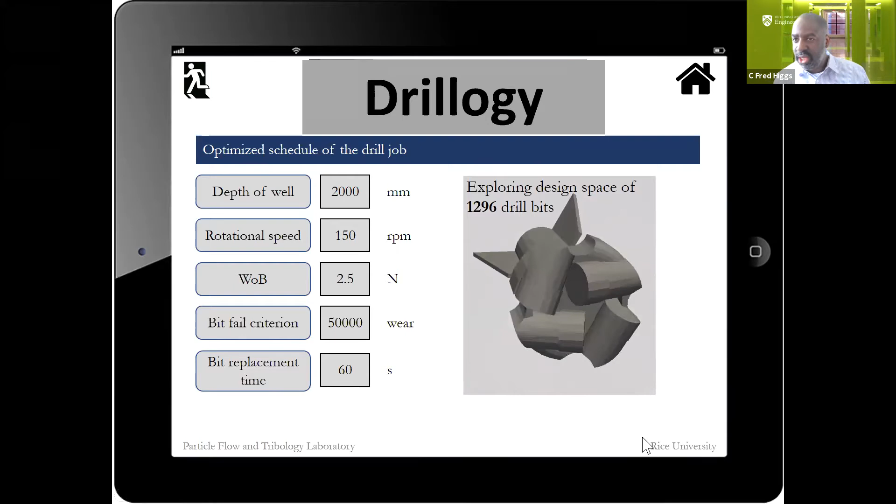So here you can see your drill bit is automatically being varied according to these parameters, figuring out what's the winning drill bit design for a certain rock property. The property is usually called lithology in the drilling community. So it tells you, well, for this one, you need these angles on this drill bit.

The bit must only be replaced once. In this one, we ran a little short within our lab. We have a drill bit, a drilling rig in our lab, so it's a lot thinner than the one we get in the field.

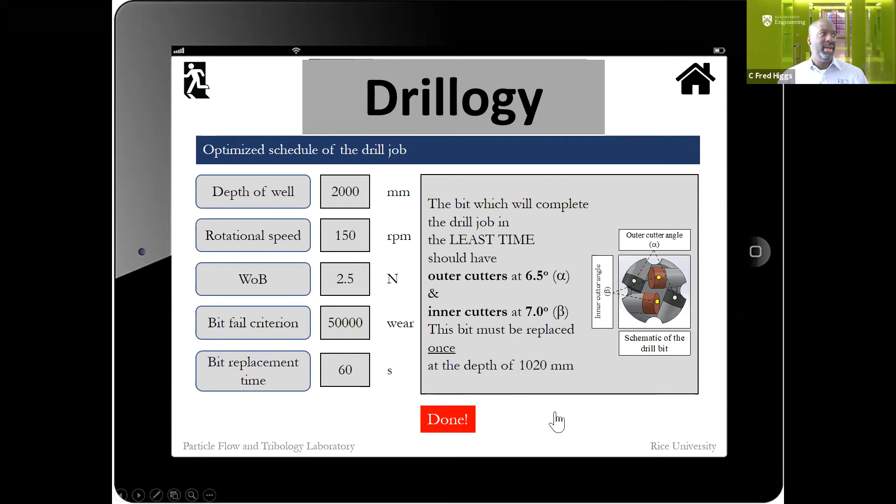And so you're constantly looking at mixing the digital and the physical. And you end up with this pattern, this is a design-for-additive-manufacturing framework. I'm characterizing digital twins, running multi-physics simulations, coming out with a tractable process map, then I tell my printer what to do. And that's what Industry 4.0 is.

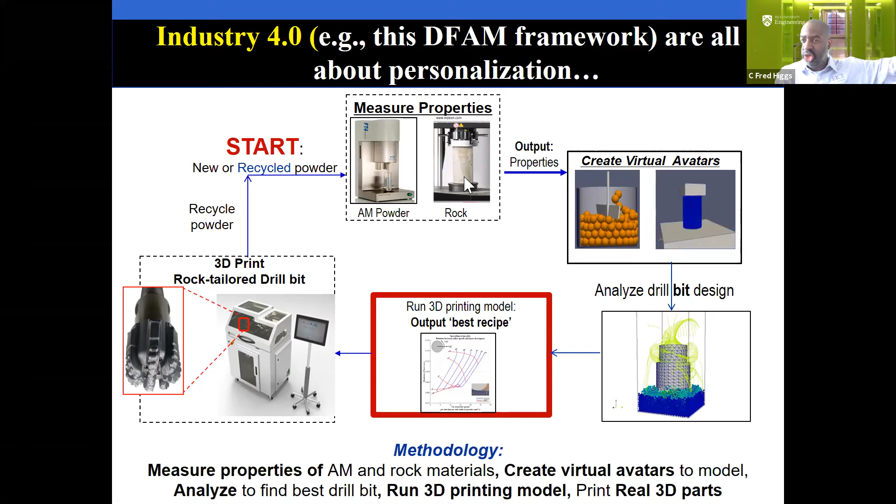It's all about personalizing. In this case, it's personalizing the drill bit to the rock. So out in the field, you might want to rapidly print drill bits for the different lithologies you're seeing downhole.

Same bit, same piece. Now we're moving on to orthopedic prosthesis. Notice that everything is the same here, except my actual component is a femoral head. You think of a drill bit, you think of an artificial joint, you have a femoral head going into an acetabular cup, and we can do this analysis here.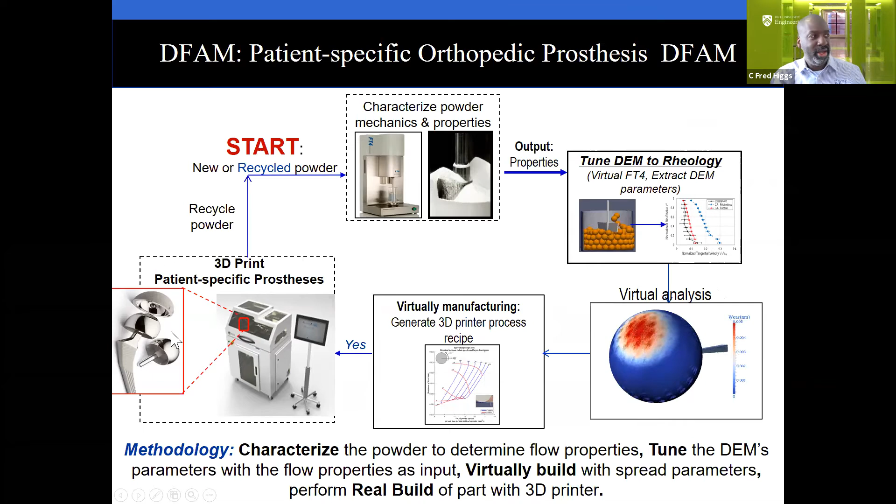And we come along with the personalized hip that you can 3D print. So it's still personalized, but now it's personalized to the patient. Here's what I mean. So you have a drill, you have a femoral head, and this artificial joint. My father has an artificial knee. So this is an artificial hip, it goes into this liner.

Why am I looking at this problem? Because you still have surfaces interacting. You get wear debris there. We love this problem as tribologists.

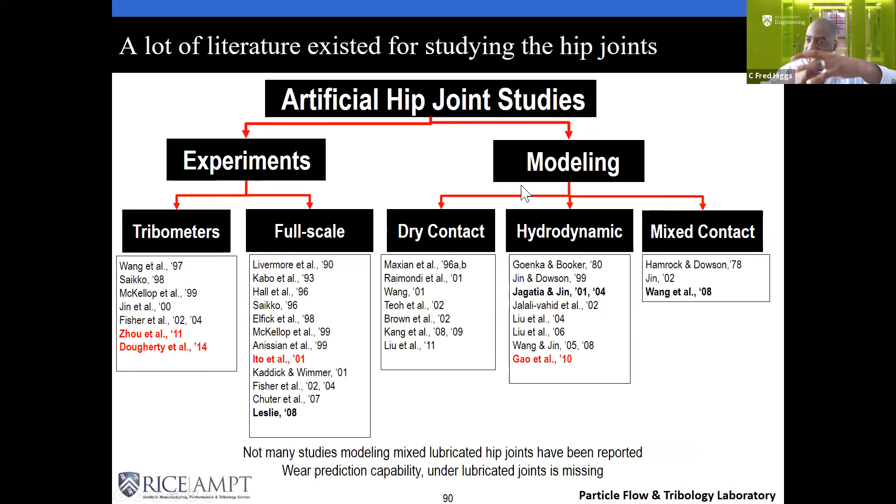And so it ends up being a problem where you have experiments and modeling. You have partial contact and fluid contact, we call it mixed lubrication. We're going to model that. It ends up being this problem we've called the particle-augmented mixed lubrication problem, where you have partial fluid and particles in that interface. So you have to solve the fluid mechanics, the solid mechanics, the wear problem, and the particle problem, because they are agents of wear.

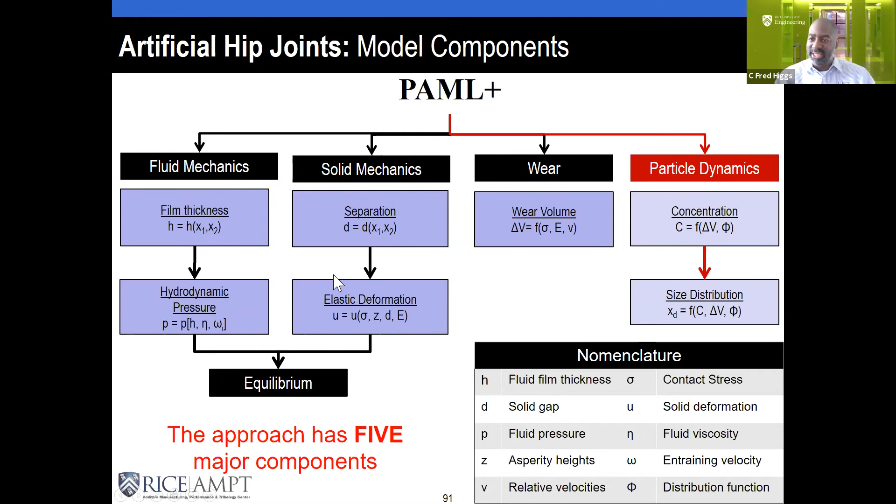And you end up figuring out the equilibrium of contact between the solid and the fluid. So here we solve the lubrication equation this time, because the main problem is the femoral head in the acetabular cup. The overall problem is a lubrication problem. We can account for contact with different means, in this case it's the Winkler model.

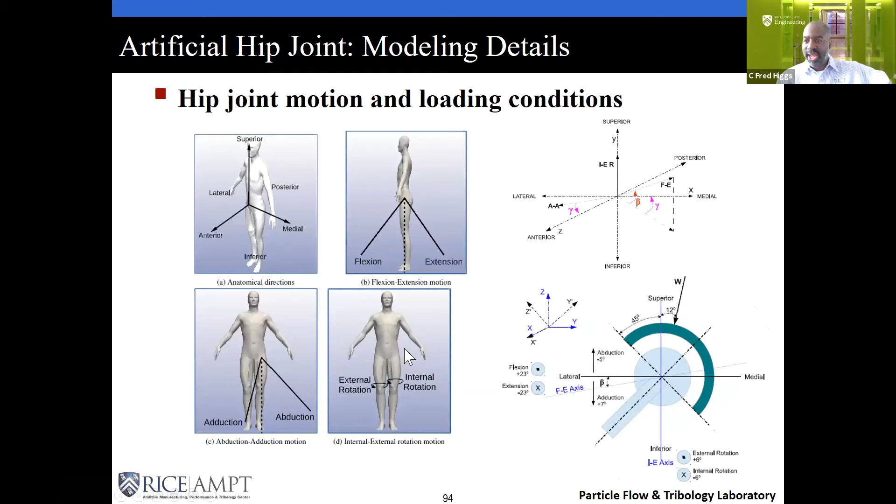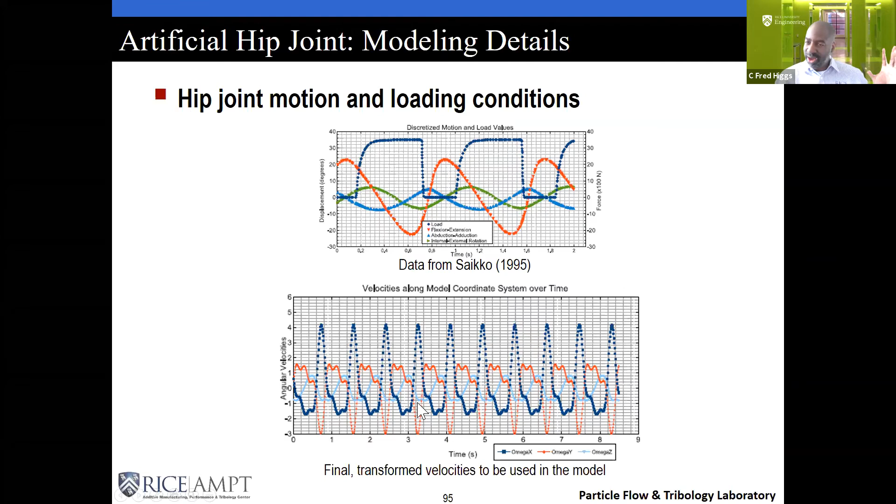Here's a person, they can have different motions. As they move, they have different load signatures. So when the person is walking, they have different load profiles, different movements. We can put all of that as input into our tribology system.

And we can do something like, well, let's say, what if we texture? You have wear debris, which is a problem with orthopedic hips. Maybe you can get the active wear debris to come into these cavities and it lowers the wear. It's just a hypothesis, because I'm in a virtual realm. And so here we could try this hypothesis, see if we have inactive debris, and let's look at it.

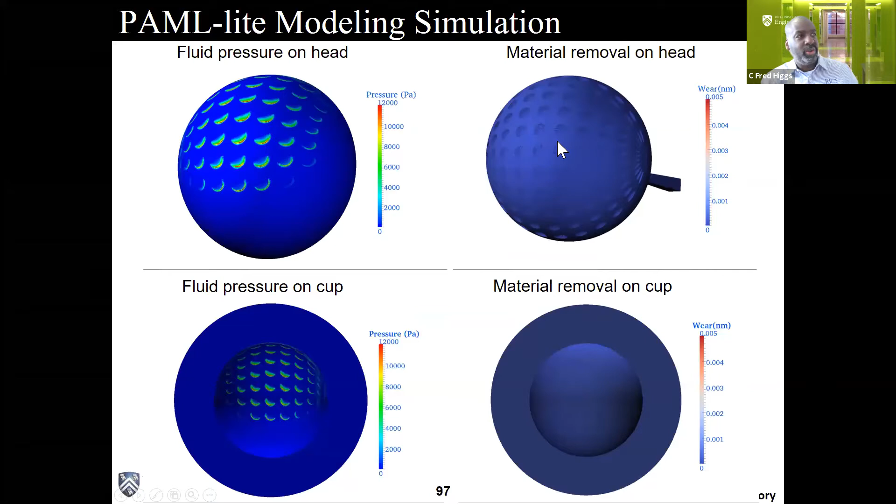Here's the femoral head going into a cup. This is the texture, running that hypothesis. Each of these little things here is the fluid pressure in the cavity. Red means high pressure, a lot of lubrication. And then here's going to be the wear there. So we're going to watch the wear project onto the head.

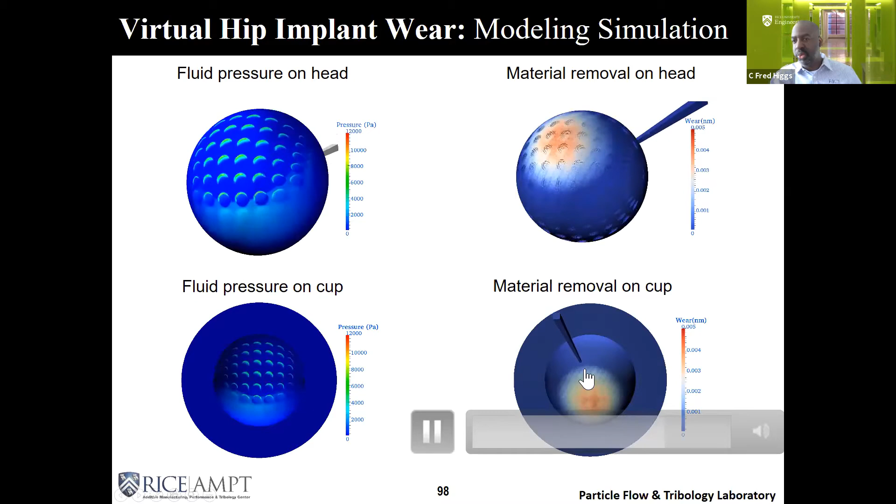So as you're rotating that, you can see that femoral head rubbing in the cup, and you're actually watching a projection of the wear onto that head. It's actually happening on the cup, but we're showing where it would happen projected onto the particular head. You're watching the evolution of wear as a person is walking, and we could account for that. So for different walking patterns, we can see different levels of wear.

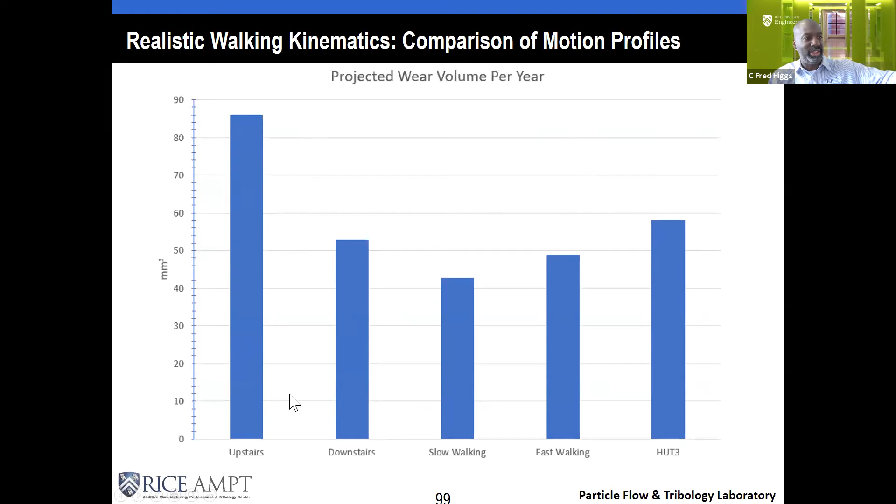The highest wear here is for walking upstairs, turns out there's more wear there than just walking fast or walking downstairs. We can look at instantaneous wear for different motions of walking, different positions of walking, and then we come away with something like this.

And so then you come out with something like this - Industry 4.0 orthopedic surgery, right? Where now you have a particular person that comes in. This is an osseointegration simulation, bone ingrowth - another problem we're collaborating on in our lab.

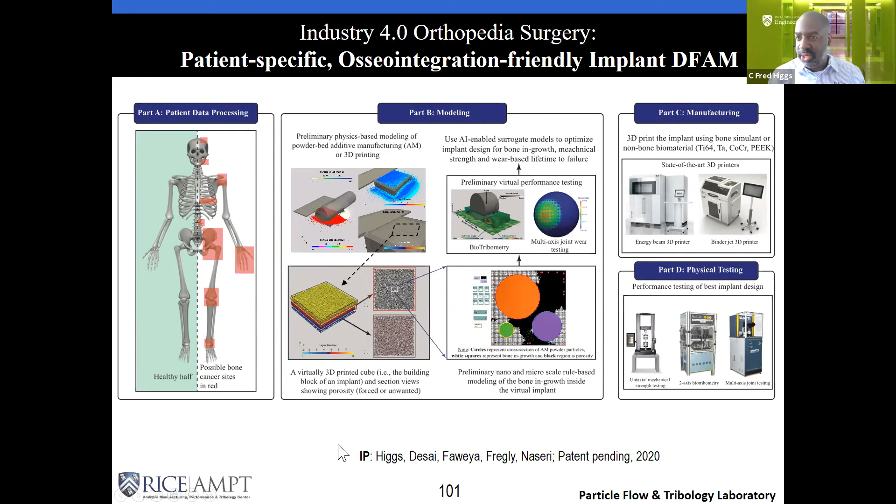But here, the powder that you can 3D print with - you can watch the rate at which the powder geometry allows bone to ingrow into that powder. So once you know what the best powder system is for this particular problem, you can then send it to the 3D printer and print your orthopedic joint - your orthopedic hip joint customized to that patient. So it's a kind of new age of that.

I just want to leave you really quickly, leave time for Q&A here. This is one that we're working on with lifetime prediction with ball bearings. Again, you have a ball bearing, you can use deep learning.

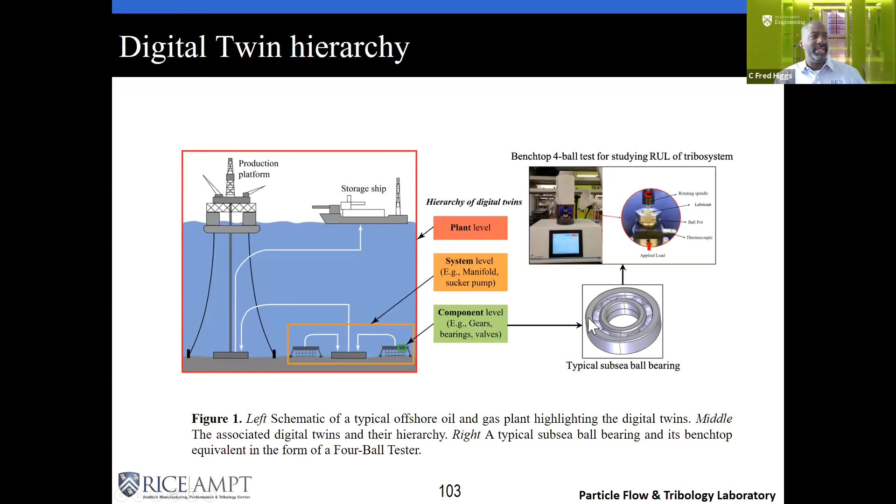We realize that we're thinking about buying sensors, but we realize that our tribometers themselves are sensors. So let's look at the 4-ball tester, and we can get data off of that. We use different things - we do interrupted tests to look at the evolution of wear on one of the balls, and you see seizures about to happen here.

This is friction over here. The blue is the remaining useful life, right? So you get a lot of friction, and then you get wear. You have a certain wear criterion - let's call this our wear criterion. Once you hit this, we say it's failure, and so now you can predict failure.

But bringing in machine learning to predict it just based on the data is one thing we're starting to look at. I don't like that problem because it puts my modeling out of business, but we do have to look at it as scientists here. And so we're looking at now bringing in massive...

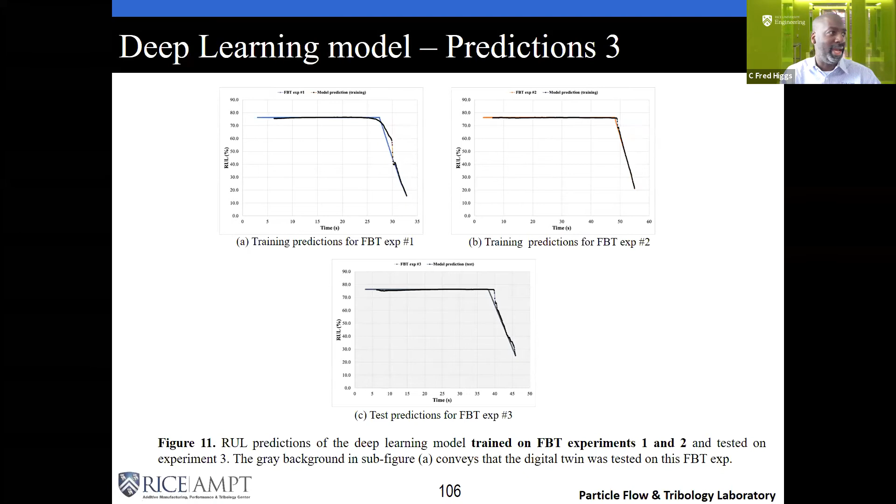Looking at massive data, seeing if we can figure out what parameters are needed to predict when lifetime will go to zero. You're starting to do lifetime prediction, just like we could do with our models here, but we're taking in more data here. So it's a new problem we're looking at effectively.

Okay, so we're doing all types of engineering prediction by mixing modeling and experiments. It brings about exciting questions with Industry 4.0 that's not been fully realized. And we're wondering - I'm still an educator, I also have a leadership role, Rice has a leadership center - I like to think about, will this change how we educate and how we lead?

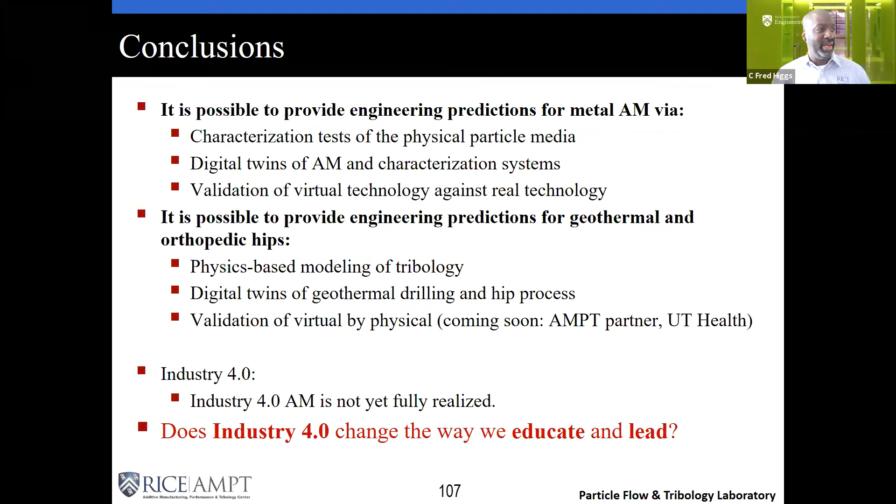We think it will. We think it's all about a new type of engineering leader here, a person that is now thinking in terms of the data and how that will change the final product. And so we've actually created a master's degree around teaching a new way to manage with the Industry 4.0 lens, which is informed by my tribology research on looking at the next generation of bringing Industry 4.0 into tribology, and what does that mean for products there. So we're looking at this as well, and we've created a degree around this.

My computer's lagging here. All right, I think I better let it stop at this one. The next slide is the final slide, but my computer's just starting to lag there, Rob. All right, there it goes.

So I appreciate it, and we have a new master's degree, Master of Engineering Management and Leadership, for Industry 4.0 leadership. So we want to create the next generation of leaders. All of it is informed by what we're doing with Industry 4.0 there, and it's informed by tribology.

Thank you. I'll take questions now. Thank you, Fred. That was very impressive - a lot of great simulations and a lot of food for thought, a lot of different areas. See if anybody has any questions, you can write them in the chat. Let's see.